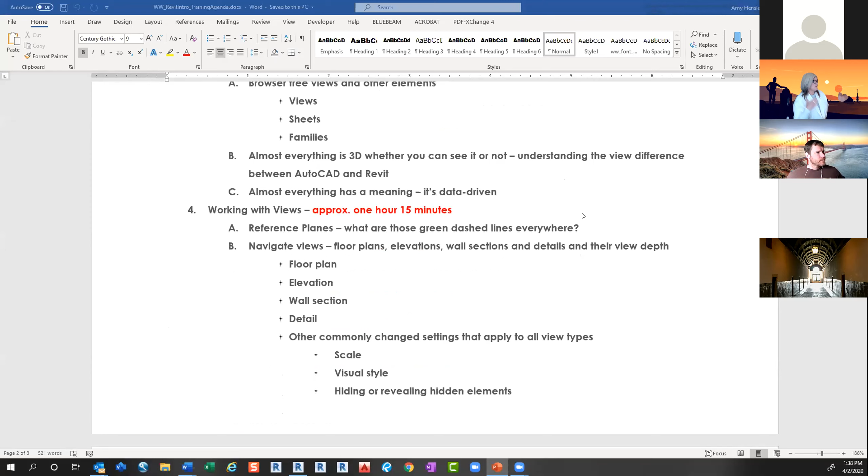So what we're going to look at today: we're going to talk about opening the file and working with these dialog boxes, we'll touch on some of them. We'll go over the Revit workspace, browser tree, understanding properties, working with views. First, I'll walk through information about views, how to navigate them, understanding what you're looking at, depth, and all that kind of stuff. After that, in section C here, we'll walk through me showing it and you guys creating these things, cutting up the model and creating your own views, and we'll talk about exporting those to DWG.

We'll have a little break in there. And then we'll go into some of the basic editing tools that you might need, and then some annotation. And then we'll do a little bit at the end about how to customize the workspace.

So again, in this part, when we talk about views, I'll walk through some important things that'll help you understand, and then when we get to creating your own, you'll have a pretty good idea. Let's see how that goes.

Okay, so first, hopefully everybody got a file copied over to their local. I'm going to move this over here. From this home screen, the best practice for opening a file in Revit is to open it from the open command. You don't want to double click it from the file manager.

When you double click it from the file manager, you miss the option of detaching from central. You're not necessarily sure what version you're opening it in, and version does matter. So I always just go to File Open or from the home screen, which will look like this or similar if you're in 2019 or 2020. We just do Open.

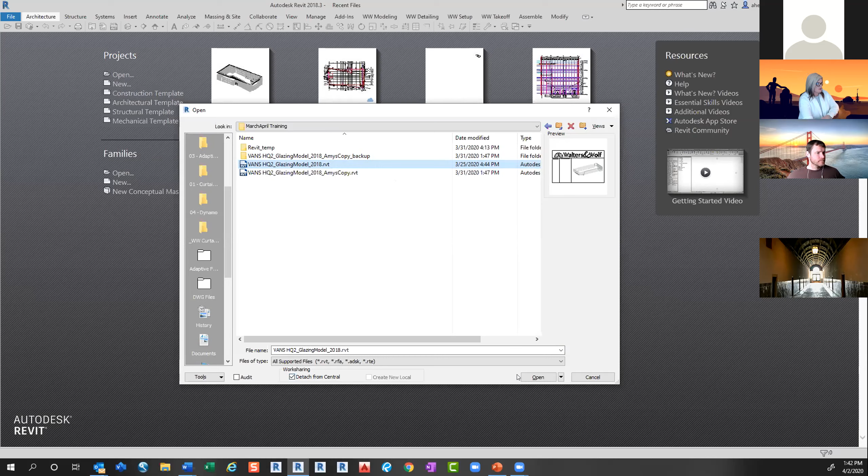Now when I pick open, I'll get the option to detach and preserve work sets or discard work sets. At this time, you can do either. It's probably faster to open with discard, but preserving them, if we have set up work sets, that can help with visibility and stuff. But it really, at this point with what our models and stuff, it doesn't matter. So I'm just going to discard the work sets just to show it's not critical at this time.

Depends on what you need it for, but we don't use them much ourselves yet, but we'll probably be getting there. So now it's just going to open up, and there's my file.

So I'm going to switch to my help document to show... actually, no, I want it—oops, pardon me. Yeah, it's in here.

All right, so your Revit might look like this if you've never really worked in it much or customized it. Since mine's already set up differently, I just grabbed this off Autodesk's website. So what we have is our main work view area.

This green area is what replaces the command line in AutoCAD. If you're used to looking down at the command line, you're going to want to train your eyes to look up here and watch what happens. Depending on what you're working on, you'll have different options, checkboxes, you can enter dimensional values and all that. That's a big shift in practice, where you're looking. You might enter a command and not know what it's asking you for, so you just want to get used to looking up here.

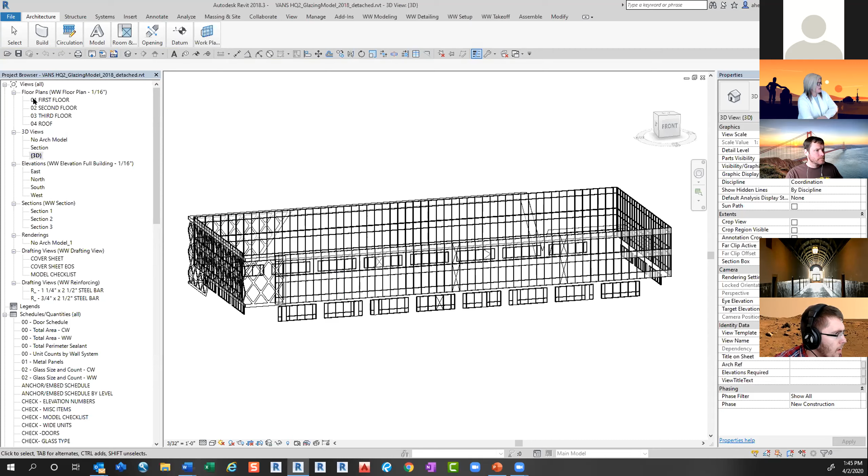Okay, so we talked about opening the file. Everybody hopefully got into that first view. This is just a default view, because of the Walters and Wolf model, set up in our template I believe. Or it might be one of the views with big long strings of text. It's just an opening view, and we're going to get past that pretty quick.

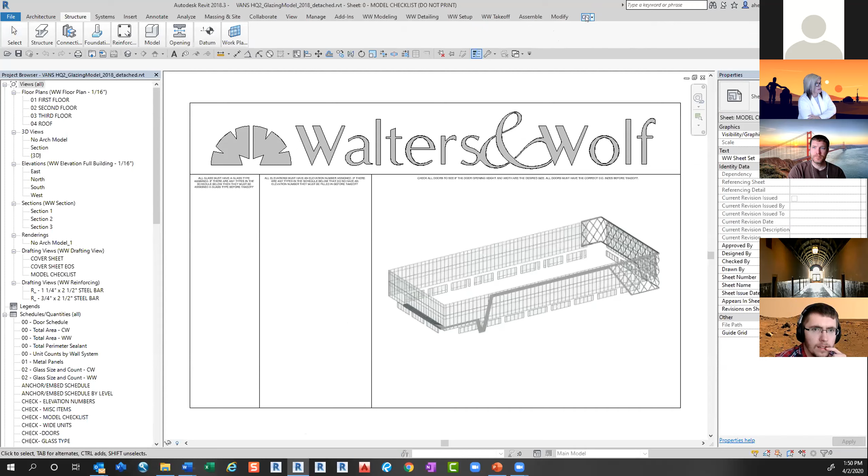So, the ribbon - this little arrow at the end. Here's the whole ribbon, fully expanded. At the right, there's the option to minimize it. I usually do mine like this. You can completely collapse it. If it's not there, just keep hitting this arrow and toggle through until they all show up. Let me know when you're good to go on that, and I'll keep going on the ribbon question. There's a little tiny arrow there at the end of this.

Or if you want to share your screen, Paul, that's fine too.

Let's see if it's there. Oops. Why won't it let me unmute? Oh, Zoom. Unmute all. So I can see it.

I do have the ribbons now, but they're just different looking than yours. I seem to have the ribbons you're talking about. What version are you working in? 2019. Okay, yeah, so there are probably some little differences. I don't have that properties bar that you have off to the right. This over here? Yeah, I moved it over there. Mine's off to the right, and it's got a lot more stuff in it than yours does, so it seems like it's all compounded into one big ribbon on the right. Yeah, okay, we can take a look at that. We'll look at customization at the end. So if we want to mess around with that on screen, we can totally do that. That's fine, so we'll go back to that then.

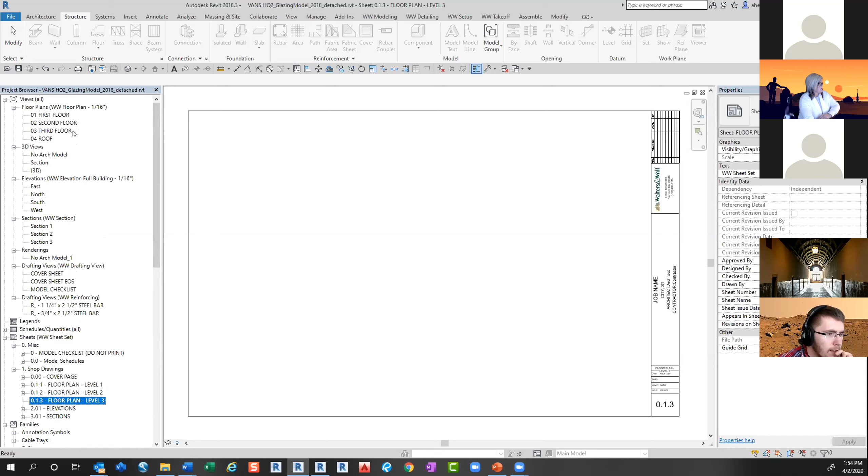No problem. Okay, so just to show you what I was talking about, let me get this view. Whoops, let me delete it here - remove from sheet. So this is just a border, the piece of paper, and the views are all up here, and it's supposed to be for floor plan level 3. So all I have to do is build my model, cut up my thing, create my views, and then I just drag those views onto that sheet.

So let's go ahead and place that view - it's taking a second. There we go. So this is like paper space - right now we're 100% paper space. I can double click to activate the view, and now I'm through my model space window, and I can right click to deactivate. You can also right click to activate, but I like that they added the double click. But ultimately, to really get to the whole view itself, you can either open it from the browser tree here, or since this is the view on that sheet, you can just double click on that view here. And now I'm just 100% quote unquote model space.

So, but we're looking at the model, like these are live elements. Something I'll point out now that you might not have set up yet.

I believe it's on the quick access toolbar by default. Let's take a look here. Maybe this one's a little squished. You should be able to find this little button that's thick lines on the left and thin lines on the right. Once you set it in Revit, it stays. But if it's not set, you might have something that looks like this. So you pick on that and it changes it all to thin lines. What this button does is let us see how it would look if printed, but obviously it's a garbled mess. So I always leave it on thin lines, in case you're wondering if yours looks thick.

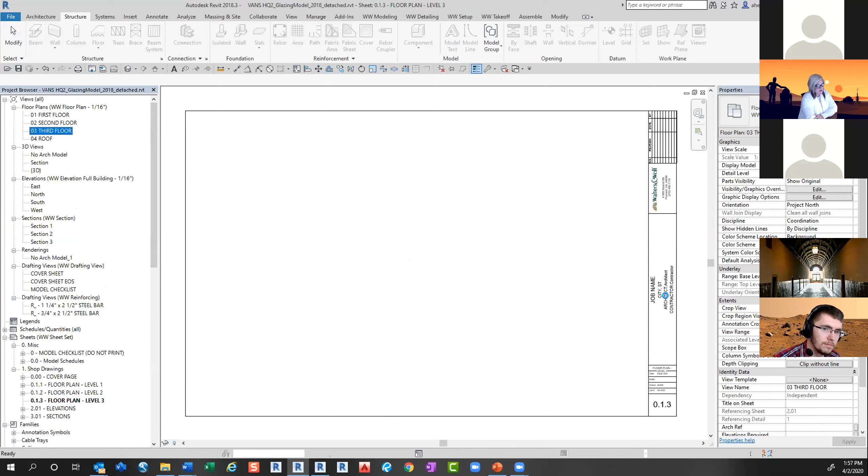Once that view is on the sheet, if you're in a sheet in a project and you don't know where the view is or how it's stored, like this gets all customized and crazy, you can at least go to your sheet and double click right from there, and it'll take you right to the view.

Got it, thank you. Yeah, sure. That's the fastest way to access it, especially if it's like an architect's project—who knows what. Like ours, we have pretty consistent standards that we can get used to.

So that's partly just to help understand that we've created the model, we've cut up and made these views, and we're placing them on sheets, and that's all controlled over here in the browser.

Going back to the point of almost everything is 3D. So obviously we know that this is 3D. It's a model, we can spin it around and pick on these things. But grids are 3D, levels are 3D, everything, everything like is on a plane.

Pardon me for a second. A bunch of noise coming from the house.

Okay, sorry about that. So I'll explain that by going to, say, the south elevation. Right now you can see there are these levels, and these levels are forever in that model. Once you create a level, it's creating that plane in the model.

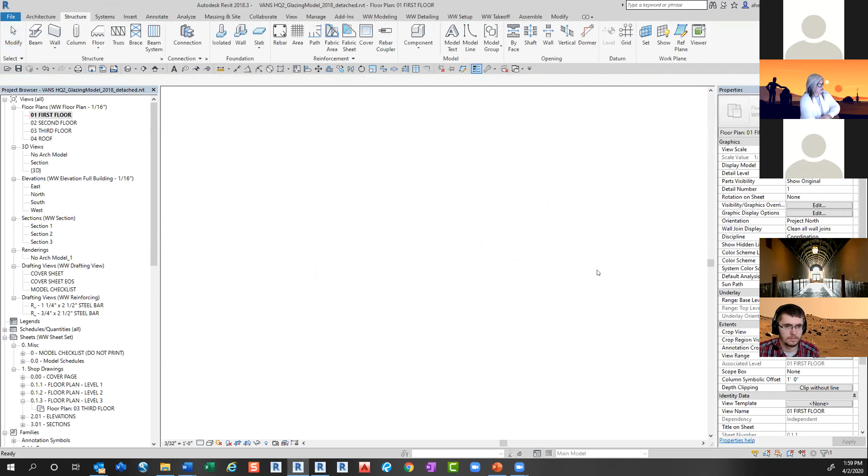Okay, sorry about that. So that grid, why is that one going through? Well, my point was going to be, once I grab these by this little grip and bring them all down, now that grid is cutting through all those planes, and if I go to the first floor, now I can see those grids.

So I went to the south elevation using the browser by double clicking over here. You can also, if I want to go to this elevation over here, I can double click, or I can pick and right click, go to elevation view.

So this is just kind of explaining how everything is, even though it's just a grid line, it's still 3D. So I just dragged all those down, and if I go back to my first floor, now you can see those grids. So if you ever get in a project and you can't see grids or whatever, try going to an elevation and see if they're just not cutting down through that floor.

But that's just trying to highlight the fact that everything in here, even though you're just cutting a view, it has depth, it has information, it has properties. So we'll talk about properties next.

So if I go back to my 3D view, and again, I showed you earlier, when you pick on a curtain panel, you get all kinds of information here. So right now in this view, or any view you might have open, if you just pick out an open space, you're going to see information about the view. If I pick on a name of a view or something in the browser, now I'm seeing information about that because that's what I selected.

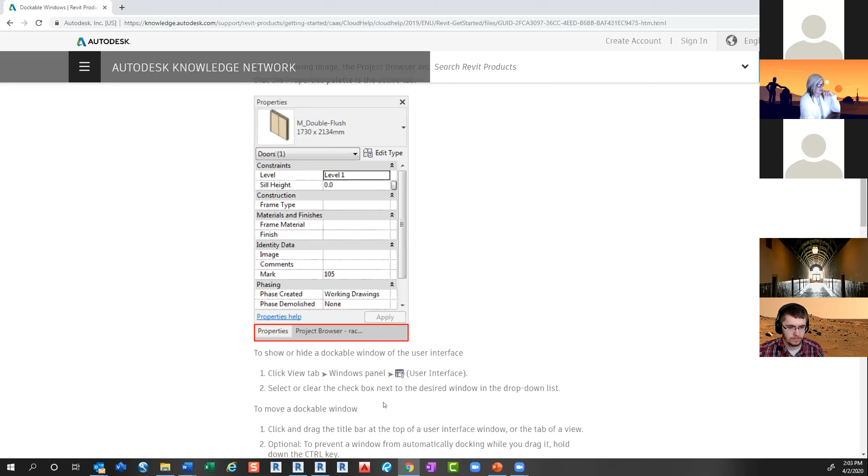Okay, so do you mind sharing your screen and we can take a look at that? You can try it. Because you might not be the only person that has that question. I think what you have to do is grab the title bar at the top. Yeah, okay, so you're gonna share, okay, great. Yeah, right, go for it. Okay, can you see my screen?

Not yet. All right. There we go. All right, how about now? Okay, so I have this over now here. You can see it, fine. Okay, if I try to drag this over here, both of these come with it. So if I try to go like this, and it wants to go to my second screen. It's not kind of letting me do, and then it wants to go horizontal, which I don't like. Right. Can't seem to get it to do. It goes that way, but it won't go left or right.

Let's see, try to ungroup within the group, click the tab. So can you try clicking and dragging the tab instead? Did you try that yet? Yeah, try grabbing that and dragging that. Did it undock it? Oh, it did. It separated it, okay, great. So go ahead and try dragging that over to the right. There you go, awesome, it's the little things. All right, so yeah, okay. So we know we need to grab it by the tab. Okay, and yours popped right into place. Okay, good, okay, I'll stop sharing.

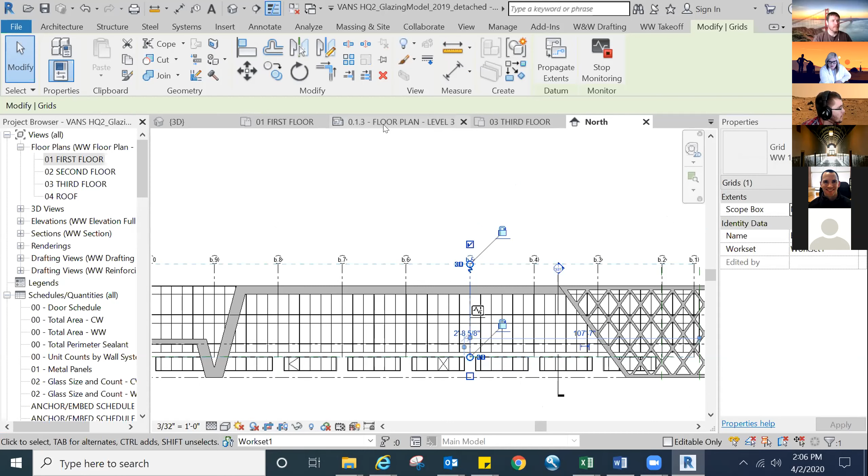So I'm trying to just, you're going there and dragging down? Oh okay, grab on the open circle part instead. Oh okay, that little guy, yeah. I kind of did it quickly, but in this case it's finicky. You kind of have to zoom in and make sure you're grabbing just that open circle. So now you've got it. There you go, you'll see. So there's all kinds of grips. Yep, there you go, okay, so it moves all of them. Got it, okay, thank you. Okay, yep.

All right, so now we'll get into understanding how to navigate these views. If you want to make your own views for your own dimensions and your own purposes, or even if it's RFIs or anything, understanding how to work in these to get what you need for references is really important. One of the first things you'll probably notice is there's these green dashed lines everywhere.

Those are reference planes, and sometimes we need them. The modeler needs them. Sometimes we just make them temporarily, and then we're not very good at cleaning up after ourselves. But if they're in a model you're working in and you don't like them, you just want to make sure you don't delete them. I'll show you how to hide them, because there may be elements in the model that are actually constrained or locked to those reference planes. And if you delete the reference plane, you actually delete elements that have been modeled.

So if you don't want to see those reference planes, you can hide the category in the view. There's a whole lot of ways to play with the visibility options, so we're just going to touch on this one for now. If you pick on the reference plane and right click hide, and tell it category - we're going to go over this again later - you can go ahead and do it along with me though. I just hid the category. So down here on the bottom, that hides all the reference planes in the entire view, just this view.

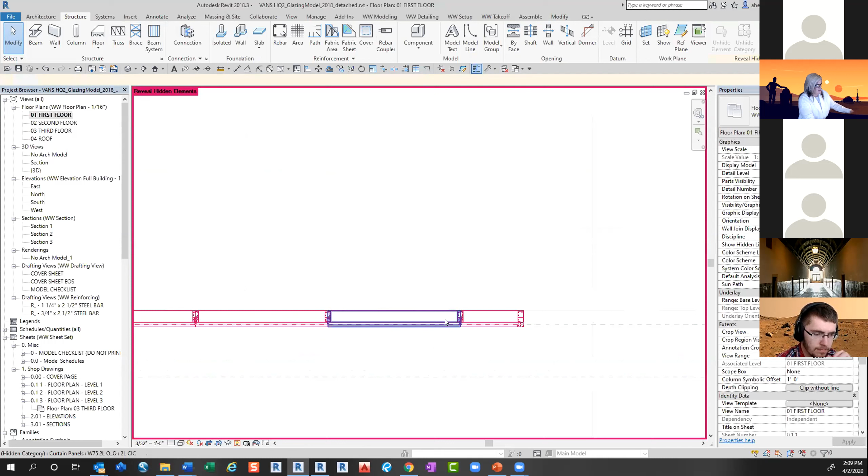If I wanted to hide the curtain panels, I could grab a curtain panel, right-click, hide in view, element, and just hide the one curtain panel. I'll undo, or I can right-click, hide in view, the whole category, and now I don't see those curtain panels anywhere. Then to bring them back, I click on that little light bulb, and then I can see it. I right click, and since I know I did the category, I'll do unhide category. Elements isn't even an option. So you can do a single item hide or a whole category hide.

There is this temporary hide/isolate where it's just for the moment, it does this same kind of thing. If I click on that, I think I have to pick an element first, so I'll pick that reference plane. Then I say isolate, and what that does is turn everything off but this element - or isolate category, isolate element, or isolate category. If I do that, I see everything of just that category. But this is just a temporary setting, so then I just can say reset.

So if you know you don't want them in your views, the way to keep them permanently hidden is to do the right click, hide in view, category. Now in your view, you don't have to see them at all. The other way is just temporary. I'm going to do a Control Z to undo that. But that's the reference planes - I'm just explaining the part about hiding the element now because it's important to know that you don't want to delete those, because it could blow up the model.

Okay, so we'll talk about floor plans first. Floor plan views are created based off the levels that are in the project. So if I go back to the south elevation, I just clicked on it in the browser.

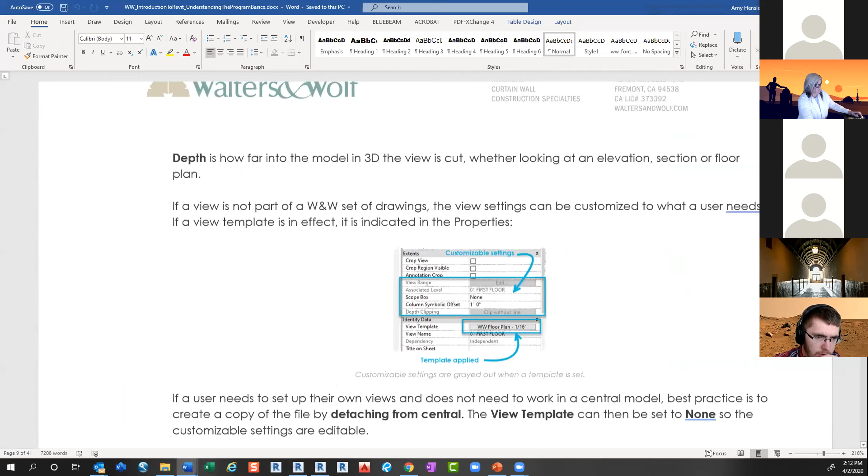So I want this view range to change a little bit. By default, it's got several settings in here, and this little picture is supposed to help you understand this. This is the part that takes a little while sometimes to get your head around, but I'm going to bring it up in the Word document because I can zoom in on it. This is right here.

That same level—but you can also tell it to go below, like an underlay if you want it to look at it that way. So you can have this view depth, which means you're setting it to look even further down below. The top, I don't usually really mess with that. Maybe that would matter if you were doing a reflected view, but I never really mess with it unless I need to move my whole cut plane way up high, and then I'll just set the cut plane and the top at the same level. So this one's kind of a funky one. I hardly ever mess with that.

But to show you what that means in Revit—right now I'm cutting the 3rd floor, but if I want, I can tell it to look all the way down to the 1st floor, and that way I can see things that are going on below as well. So that view range has default settings that, once you turn off the template, you can go in and change. I'll just set it back to the 3rd floor.

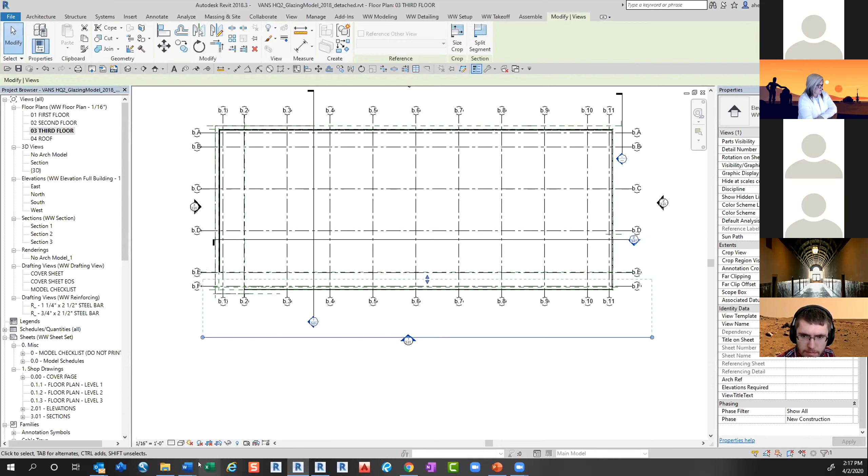So what that looks like - here's their elevation, and there's their far clip. Here it's saying clip without line, so there's no edge around, you're just seeing the extent of what's happening at that point. Here they're saying clip with line - I want to see a little edge. And this one is where they're not even clipping - it's not clipping at all, it's just showing everything, even though the elevation bubble is out here and the line's there. So that's the difference between those settings.

I usually use clip with line to make sure I know exactly what I'm looking at. When you're in a wall section, it has the same kind of settings. You can drag it to see how far you're seeing into that model - again, you're cutting it live. You can move it, and your view will change depending on where it is and what you're looking at.

If I go to this view now, I can see this wall here, and I can see this wall here. But if I want to see more, and this is what I do when I'm checking my models, I'll actually drag that line all the way down. If I go to that view, now I can see what I'm cutting through, and I can also see what's beyond. This is how I like to check to make sure I actually got my horizontals lined up - I can put a little reference plane here, run it across, and see if I've got everything lining up nicely.

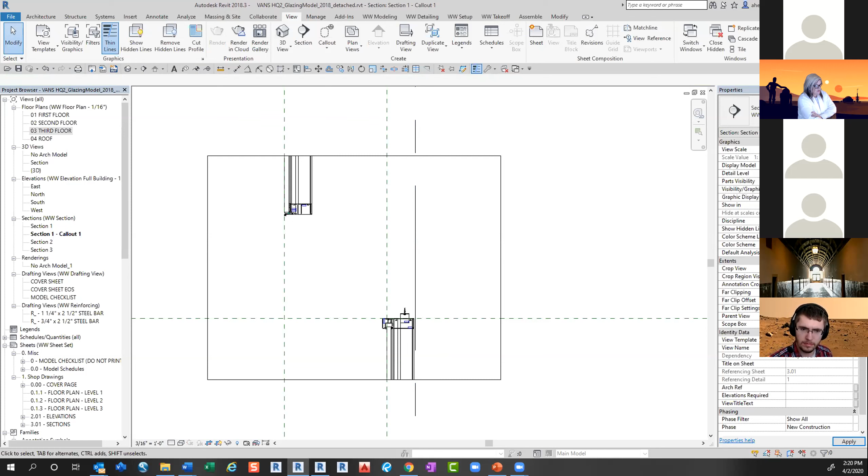If I go to it, first its settings are the same as the parent view as far as how far it's looking, so usually that's probably fine. But if you wanted to do something different, you could go independent and change that far clip offset value to like 50 feet, and then I'd be looking all the way down to, maybe it's like 300 feet. Now I can see what's beyond, so you can mess with that. But by default, it's the same setting as the view you cut it on.

So that's just a rough overview of how what you see is manipulated to show what you need. In floor plans it's with the view range, and in elevations, sections, and details it's with that grip there—shows you how far you're looking.

Some of the other settings in the views are your scale, which I use this one because I like to see the whole list, but it's also up in the properties. View scale by default with Walters and Wolf views gets set by default. If you're working in an architect's model and want to create your own view and do your own thing, you can just mess with the scale, whatever you need it to be, over here.

Hey, there's Amy, visual style. Yeah, another question. Is there a way—I guess I'm having an issue where I'm not seeing your full screen, so when you're going down to the bottom to select certain items, I'm not sure if it's just a setting on my side on Zoom, or if others are having that issue.

Let's see, let me see if I can help with that. How far down—can you see this down here now? Yep, I see it now. Can you see where I'm at? Okay, all right, so I'll just keep it a little bit shrunk. Okay, all right, thank you.

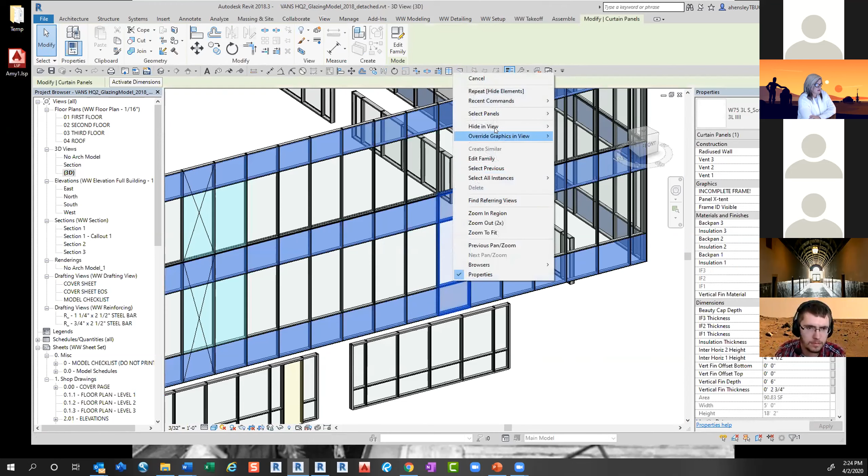Or I can right-click and pick 'hide category,' and now all the curtain panels are hidden. Then I come back, right-click, and unhide that category. This is really helpful, especially in architect's models where there's a lot of extra stuff you don't need—you can just pick on it and hide it. There are lots of other ways to control visibility, but that's one quick way to get something out of your way.

Okay, so now we'll walk through making your own views. This is the part where you can work along if you haven't yet, but if you were, that's cool. Go ahead and go up to the floor plans, select the first one, hit shift, select them all, and just hit the delete key.

Okay, so now we have no floor plan. What happened? This is going to happen if you open a model that we've cleaned. When we get architectural models, sometimes they're 500 megs, 800 megs. We have a Dynamo routine that can delete all the views, links, drawings, sheets and other stuff, letting us shrink the file down a lot. But then you open it and there's no floor plans. So how do you get your floor plans?

We'll talk about making a 3D view too, since that'll be one of the first things you want. To get a floor plan back into a model, you just go to the View tab and the Plan Views option, and from that drop down just take the one at the top. I'll walk through this a couple times—this popup is going to show, it always does.

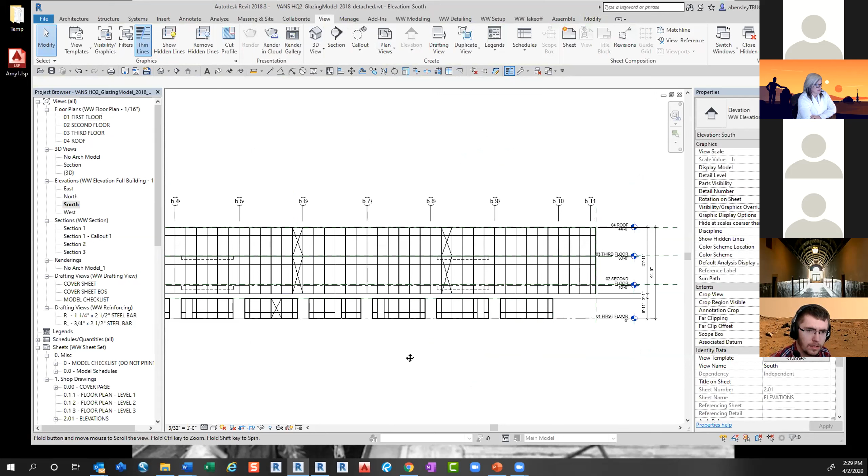I went to south and I don't even see those grid lines to drag down. Okay, so let's see, what are your settings? Let's look at your screen—go ahead and do a stop share.

Can you see my screen? Yes. Do you see my Revit? Yes. Or is it just my screen? Okay, this is what I'm looking at right now. So where are you needing to look? So, no, you're in the right place. Those grid lines are up there.

See the B10? Like any one of those, if you select it, go ahead and select one. Oh, I see. Now zoom in and make sure you grab—that's the annoying thing, zoom in a little bit. You want to grab the open circle part, since there are other grips that get in the way, so it's always annoying. Go ahead and drag those down, and those will show up on the first floor, because you're telling those grid lines to live all the way down below the first floor. So now if you go to your first floor view, you should be able to see those.

I see, and there they are. Yeah, okay, cool. Thank you. And yeah, sure.

Sorry, when I was following along with what you were doing, I think I grabbed the bottom open button, not the top one. Oh no, I grabbed that top one, right? But is that the right one to grab? That one stretches them up and down from the top. You're in the plan view, and in the plan view, either end just stretches them further out from the building.

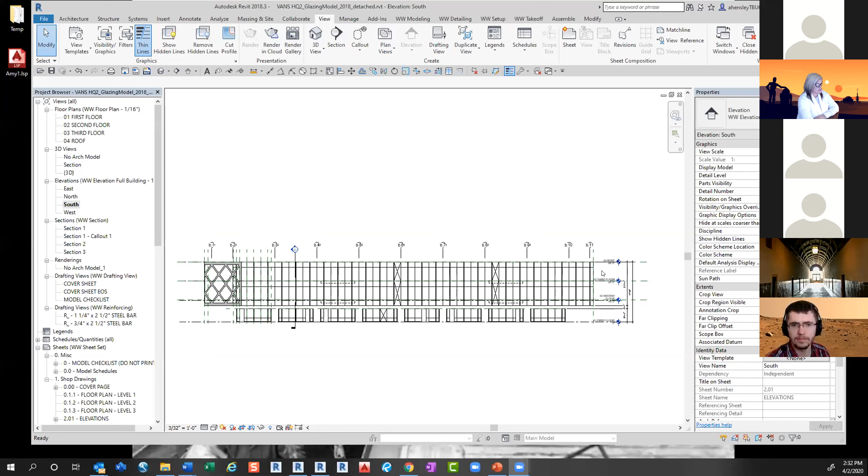So just a little bit more about those grid lines. By default, they're 3D, and you know your grid is still 3D because it says 3D right here. No matter how far I zoom in, it does not get bigger, which is crazy. But there are a lot of different symbols and things happening when you select that grid.

Revit is letting you know some things, like this is locked in place, and this is locked in place, and this checkbox turns the bubble on or off. This tells me the distance to some other element, so that's a temporary dimension. This tells me that this grid is being coordinated with another model.

So right now we see it's 3D. If I pick on that, it changes to 2D. Now if I stretch that one down—see, I grab it wrong all the time—now it's just 2D drafting basically. Oh, it switched it back to 3D.

Now I don't know—let's see, at that point if it's 2D, I think it's because I dragged it first. You can tell them to be 2D, and we do that sometimes for drafting where maybe we don't want them showing up everywhere for whatever reason. So you can tell it to not be 3D anymore.

Top and bottom, there we go. Now if I get that and drag it down, it's not going to show because it just sees it as a drafting kind of line now. So as long as it still says 3D, I'm just doing some undos.

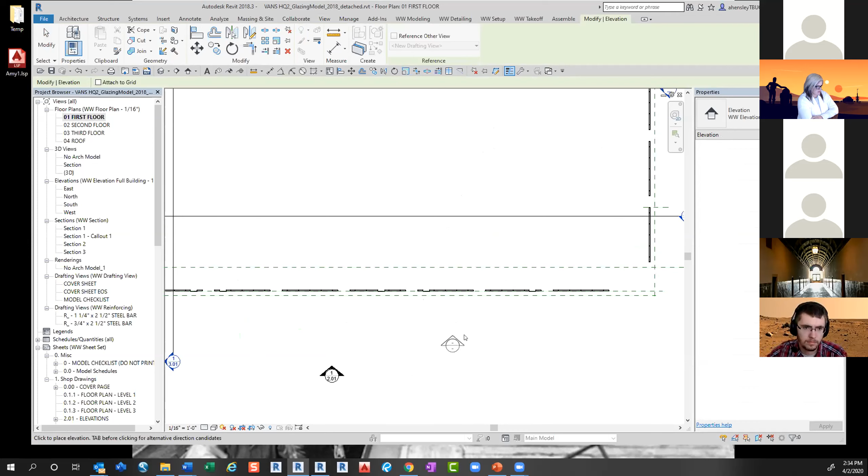And it's bringing in our Walters and Wolf elevation bubble. You can see as I move it from inside to outside the building, it looks at it. It's intuitive—it knows by default where you want to look. So I'm just going to go ahead and pick to place it. It asks me if I want to do another one, and I'm just going to hit escape.

I'm going to show it to you first—we're going to walk through this again too, so don't worry about trying to do it right this second. So you place the bubble and you pick on it. Hopefully the crop region visible is set; if not, you check that because that's how you get your little grips. And I'm just going to make a little elevation right here.

And then this is fine where it's at—this is how far into the model it's looking. I'm going to right click, go to elevation view. Here's my crop region, I can pick on it and adjust it. And then I can just finish it off like that. And now I've got that view.

And if I wanted, now that I've done those view settings, I could grab this and copy it over here, and now this view is set exactly the same way, but looking at the next bay. Which is different than—I'm going to delete that view, then if I come in... whoops, left some junk behind.

If I create one here all over again, that means I can also double click. I didn't adjust the crop region, but if I come in here and I've got to do all that—whoops, I do that all the time too. You probably will too, it's okay. It's not critical where this line is; it doesn't have to be right on the center of your symbol. It can be like right there and it's okay.

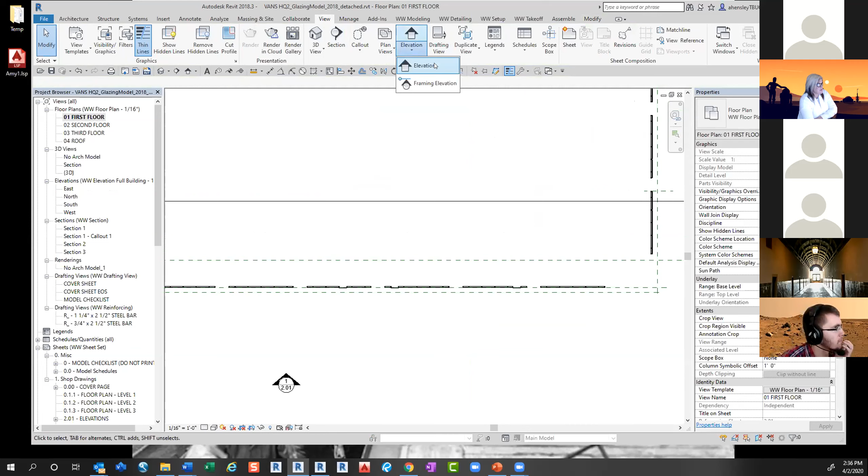Okay, so again, view tab—this is where you can do it if you haven't done it yet. You want to get that elevation bubble and just place it. You can see that we get a new view in our tree over here, elevation 1A. If I hover over this, it tells me what view name it is. If I pick on it, it should tell me right down here—that name right there is the name in the browser.

And then I can grab my grips on each end and go to my view.

So with this crop region, now I'm just going to drag the bottom one up. You'll notice there's a little lightning bolt looking break. These are break lines, so if you had a really long elevation and just wanted to capture things at each end with one big view, you can break it.

And then you can stretch these a little bit. You can move them with the double arrow and fit it better on your sheet, so that helps with drafting. You can move them further apart, and if you bring them back together to where it looks like they'll overlap, it just rebuilds the view.

And then I grab that crop region and just drag it down. Because it already created that with the 1/4" scale, if I wanted a different scale I could change it while there's a view, or I could change templates, or change it here if I didn't apply the template. So that's the basics of creating an elevation, whether it's a full elevation or a little one like this.

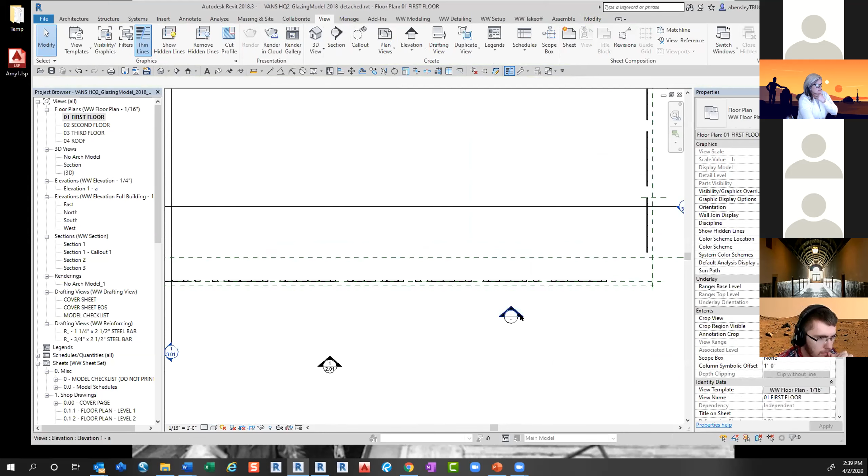Could you go over how you got the two little tabs? I keep getting the entire elevation when I drop it down. Two little tabs, yeah, you only got a small elevation view.

Okay, so I'll do this and start that again. I'm going to delete that one. Okay, so view, elevation, find my wall.

I'm going to grab on the symbol, stretch it in. Oh, I see, you drag it in. Okay, and then in the elevation view you can adjust the height, if that's also what you're asking about. That made sense. Okay, thank you. Yes, you're welcome.

So just to note, we'll talk a little bit about crop regions again right here. Right now I told that elevation to just look at this much of the model, and I have my crop region visible, which has some settings over here: crop region, hide crop region, or do not crop view. That's the same as these two.

So if I don't crop the view, I can see the whole model for the moment. Maybe I know ultimately I just want my view to show this, but I need to see something else for some reason. I can leave my crop region there and just tell it don't crop the view for a moment, and then I can see the whole building again.

Once I've placed this on the sheet, maybe I don't want to see my crop region anymore because it bugs me, so I can just turn off the crop region. That's nice to know, because even though you just see this, if you need to see the whole building, you don't have to switch to another view. You can just tell it don't crop it for a sec, I want to see something, and then okay, go ahead and crop it.

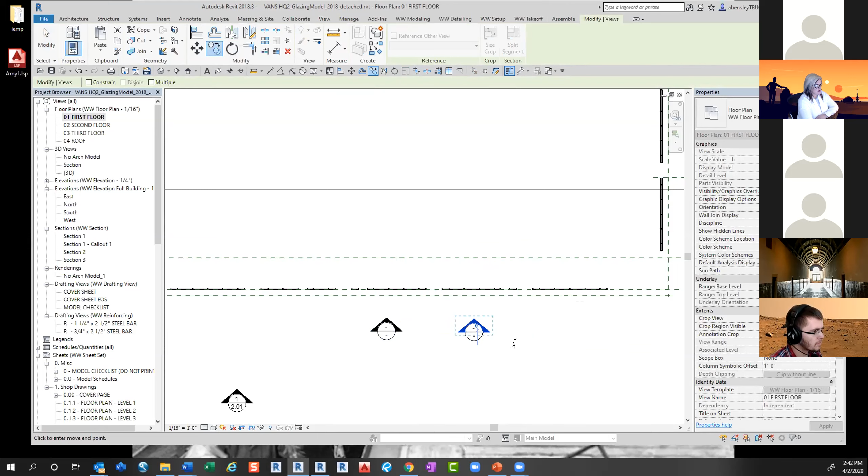Okay, great, so you can pick on it and use the copy command, and you can also do a Control-C like normal cut and paste or copy and paste. So now I just did a Control-C, Control-V, and then just grab it and move it to where I want. Or I can pick on it, and on the Modify tab this is the copy command that we'll look at later. You can use that same command here, and you could copy this. And if you want to do it all the way down the wall, before you start copying, go up here and select multiple—it's not on by default.

So let's try that again. Duplicate, let me try this again. That should be fine, you should be able to copy this. Yeah, I don't know why it gave me that. So now I can just copy these all the way down.

And now I'm getting all these new views created over here that I can go back and rename. They're all looking at that part of the model, or you need to just adjust them. You can adjust it here. So if I adjust the crop region here, it will adjust it in the plan view as well. I'll show you what I mean by that.

So I just fixed the crop region there because I was kind of messy with my copying. Let's see, which one was that? Was this one. So when I adjusted that in the elevation, you can see that it fixed it in plan because it is that live crop region.

So right now this crop region is cutting through here. Say I can fix it here if I want, or I can go to the elevation view and fix it here. It's probably better to fix it in plan so it's nice and everything's centered up. But I fixed it there.

So now my crop region's over here, but I can still move the symbol separate from that. And there's still that crop region. So if the symbol does, sometimes there are tight squeezes for trying to fit the drafting part of it.

So maybe I have to move my symbol for some reason. But when I highlight it, you can see that I'm still just capturing this area. So don't worry about the symbol staying with it if it doesn't need to, because this is the main cutting information right here.

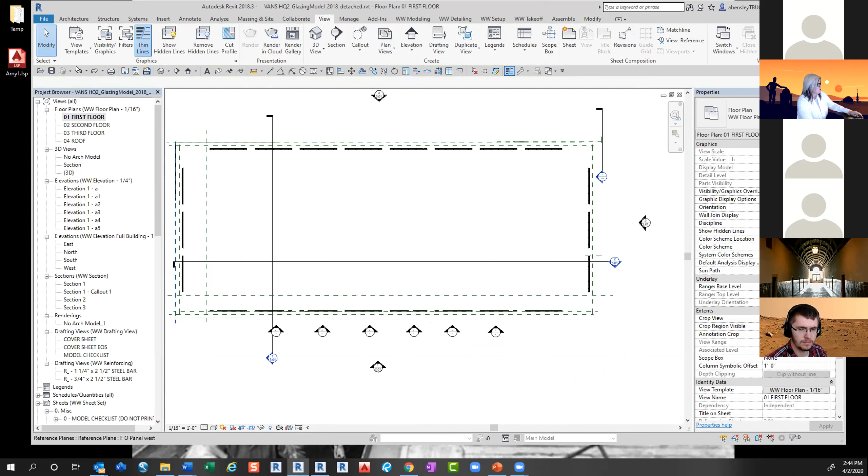So I can go undo, copy, undo, undo. Okay, so what I had done was I grabbed it and did copy. Well, the first one I did copy paste. Yeah, when I did that, I just tried it again and then it was okay. So I don't know, if you do it a second time and it's still doing it, let's take a look.

You can share your screen. Yeah, definitely still cannot get past it. Okay, so let's go ahead and share your screen and let's see what's going on.

Oh, that's the big elevation. Okay, it might be because that's a full elevation. That's not the one, try making your own and then let's copy that one. I'm not sure if that's because of something, since that's a full elevation that was already in the model.

Let me see if I can even copy it on mine. No, I just created this one. Oh, you did? Oh, okay. I thought that was the full elevation, but I guess it's not, right? Sorry about that, go ahead and do the copy command.

I'll do that. So after that, do I just click anywhere? Yeah, sure, pick 2 points to duplicate. Okay, go ahead and cancel that, and grab - instead of selecting it the way it did, do a window around the whole symbol.

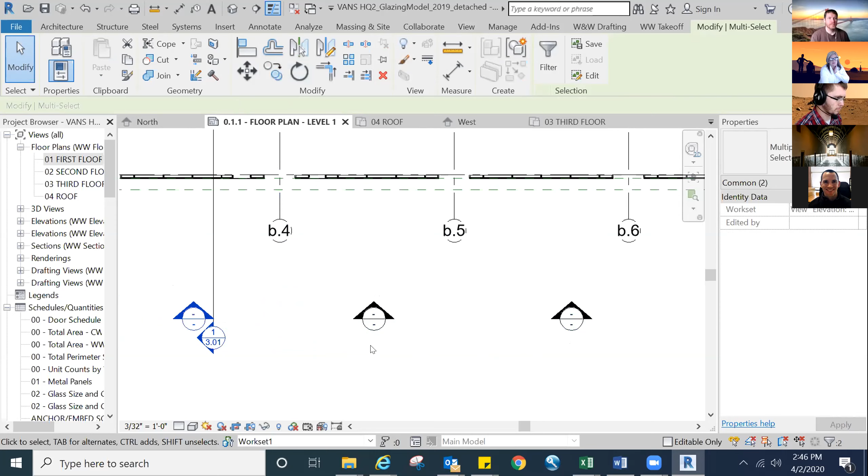But if you make sure that you're correct - see, when we just do that part, it doesn't want to. When we just pick on the arrow or the triangle part, it wasn't working. But if you pick on the whole symbol, you should be okay. Yeah, seems like the difference is clicking on the right-hand side and then extending over to the left, versus just clicking on it or going from up or down to lower - it won't grab it.

Yeah, exactly, so it's a temporary thing. Just change the way we're selecting it. Alrighty, good.

Oscar, I was having the same issue too, and now that I did it that way, it worked. Okay, great.

Good, okay, so that was creating the elevation. Now we can look at, if everybody's good to go, we'll create a section. Same thing on that view tab, section cut, and then just pick 2 points where you want your section to be cut. It shows you your little crop grips, and you can bring it in, and it creates that view over here in the browser.

If I want a section here, I'll just do view section. I can do a little short section here, and then I can grab my grips. And then what you'll see, a couple of things I want to show you here. I'm going to move it over a little bit because it's in the way of that bubble.

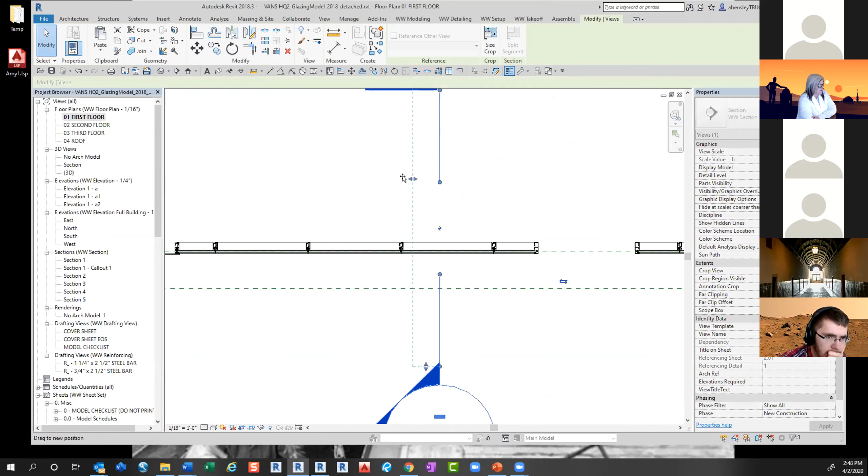So right now, if I pull this crop region in, right now I'm just telling it cut here through these horizontals, and that's all I want to see. So if I go to this view, I'm not going to see a vertical beyond. I don't see anything but what I'm cutting through. But if I adjust it by picking on it and grabbing that little crop line there, go to view now, and now I can see the vertical.

So sections, let's see what else about a section. You can grab it and you can grab the grips, and even though the drafting symbol is still just there, now my view is cutting through the whole building.

I can pick on it and just stretch it back down here and go to it. But again, if I want to say don't crop the view, I can still see the whole building. And then I can tell it to crop that view again. The symbol comes with a little break so that you can make it pretty.

If you want to make one section and then move it around the building to look at other things, you could bring it over here and you can rotate it. I'm just going to type in 90 and move it - we're going to talk about rotate later. Now I'm looking at this wall, and now I can check things this way if I needed to, depending on what the purpose of the section is. I'm just going to do a Control-Z to go back to where I was.

So the other thing to point out is now that I've created this section right here, if I go to this elevation, that section callout now shows up. So it knows everywhere where it lives. And now I can grab the height of it here if I want.

Just do some adjustments and say, I just want to look through this part. If I go back and do that, so that it's looking - go back one more. Okay, so now this is where it's really looking, even though the drafting symbol is just there. If I go to this view, I can also grab that crop region here and shrink it down to just what I want to see.

If you want to make it, I'm just going to delete that. If you want to make it on your little elevation so you can see how it shows up, just grab that section tool, pick 2 points, adjust that far clip line to where you want to see, maybe put a little break in the drafting line. And then if you go to that view, again, right click, go to view.

A lot of times you can just double click - I think it's, yeah, you can just double click the section symbol if you want. Grab that crop region. So one of the things you'll notice right now is the text is really huge.

And that's because we haven't set the scale of this section view yet. It didn't have a template applied to it by default, but I can come over here and change it to 1/4 inch equals a foot. I can grab the little dot on this level and adjust it and bring things in for drafting purposes. So a little stuff to mess with there, but getting that cropped to where you want is just understanding how to control what you're seeing, which is important.

So that's a section view. Now we can make a couple of different kinds of detail views. In that section view, we could create a call out here that's looking at it - it's a section detail. In Revit, they're called call outs, not detail bubbles. And this has our little Walters and Wolf settings as well.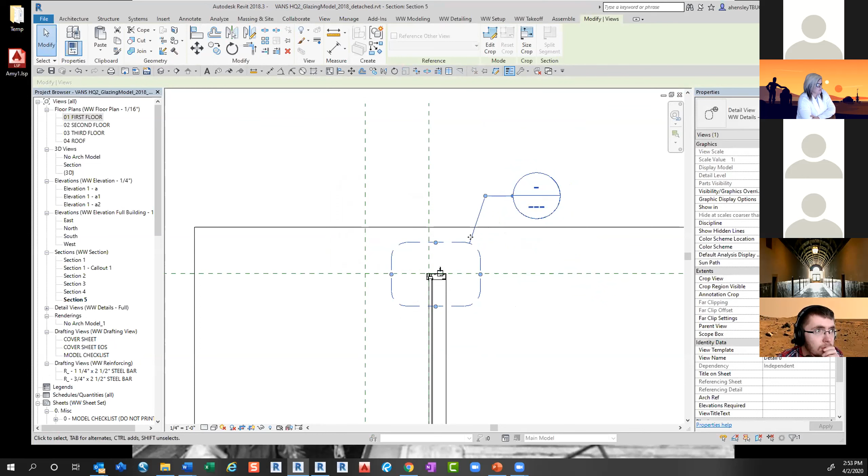I'm going to delete that. If you're in somebody else's model, you should still be able to just create a call out, and it takes whatever their settings are. It at least gets you to what you need to see, and it may not look as nice as this, but it still gets you what you need. Go to that view and then set that scale - turn off our template. Set that scale to 12 inches equals a foot, same as 1:1, and then you should be good to go with a full-size detail.

If you want to create a call out on an elevation view, you can do it a couple of different ways. You can create the call out like we just did and do a rectangle, and it'll make a little elevation view. Oops, I just double clicked it - you'll see that when I did that, I went into border editing mode, which we don't really need, so I'm just going to cancel that. Right click, go to view, so I get a blow up of that elevation. But I'm going to delete that.

And you can also do a section. In our projects you can use our little templates here, but you can do this no matter what. Now when I pick 2 points, I actually get a little section cut detail symbol, and I have the little flip grip - I didn't talk about the flip grip in a full section, but there's the flip grip, so you can just switch which way you're looking with your view.

Tab - sometimes if you try to select something and it won't let you, just hit tab until you get what you want. There's a lot of tabbing in Revit if there's a lot of stuff congested or whatever. So if you try to come over to this, let's see if I pick on something else - just hit tab if it won't let you grab it, until you get your grips. If I pick close to it I can't grab it, but if I hover there and hit tab, then it highlights it and then I can select it.

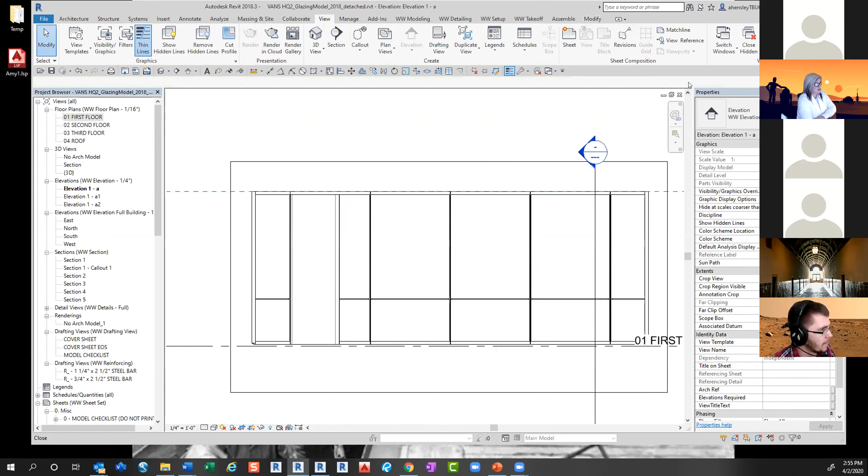Okay, walking through those different details again - I'm going to delete this, and we'll go back to the section view. Delete this. So in a section view, if you want to create a section detail, on the view tab go to call out rectangle. You can use a template if there is one. You'll see that until I get big enough for the bubble radius to have its curves, it's just a little square - it depends on the settings in the project.

Sometimes you can't get around that, it just depends on the settings. And you can just drag that around - now you have your detail view. Go to that view, set the scale. This one has the template, but if it did not, I would tell it to be 12 inches equals a foot.

As you're collecting all these views - we'll still stay on the detail view, I'm not going away from that - you could create your sheets. Here's my new sheet, and now that I created that detail view, I can put it on the sheet. I can adjust the crop region, double click to activate that view. Now that I'm making it smaller here, it's going to turn into a small square on that wall section because this is a live cut. So I actually just placed that view on that sheet, but it's still a live cut - so back in my wall section, it turned into a little square because I made it such a small crop region. So there's sometimes a little give and take in Revit.

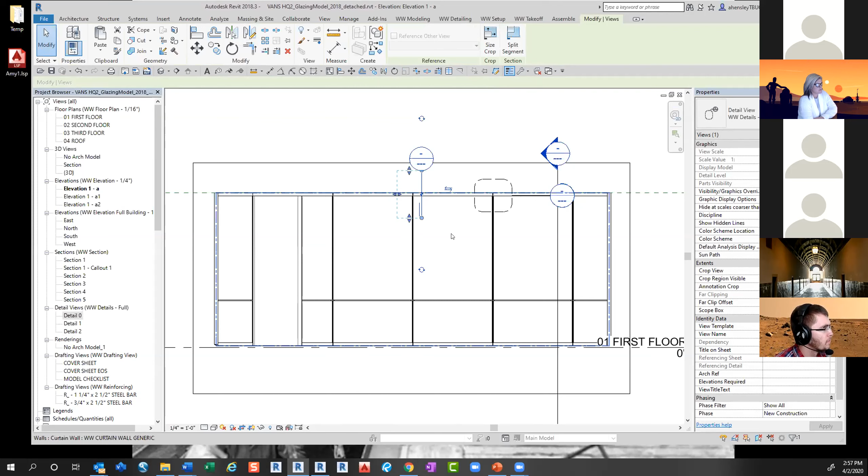Okay, so any questions so far on any of the detail views or section views? Everybody cruising along? Let's talk about creating a 3D view. That's really easy. Oh yes?

Sorry, I missed how to put the detail on a sheet. Okay, so we'll do that again right now, and then we'll go over it again, but just to show you, when you're ready to make a sheet, down here in the sheet section, if you're in one of our projects and you right click and select new sheet, our title block will be available.

If you're in somebody else's project, you can load in our title block. If you're working in someone else's model and you want our title block in there, the title block is a family that can be loaded, and once it's loaded it can be available here for you. So you just pick OK, and now it's created that sheet.

And that sheet is not categorized yet, so it just lives down here under these question marks. So now I've created the sheet. Now I just want to expand the part of my browser where that detail shows up, and then just drag it onto the sheet.

And once it's there, if I don't, right now you can see all these borders on it. That's because the crop region is visible. So first I could just say, I don't want the crop region visible. Let's see, is this annotation crop? Oh, that's just the viewport. Oh yeah, that's just temporary.

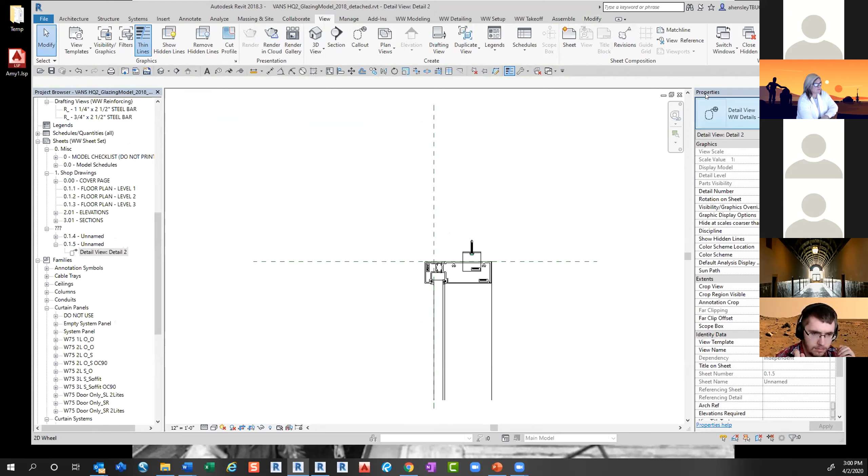So again, you just create a new sheet and then place your view on that sheet. We're going to look at that again when we get into dimensioning, because if you want to make it like an enlarged plan and put some dimensions on it and throw it on a sheet, we'll do that again. I don't think I have sheet creation in that intro, so I should put that in there in the document.

Okay, so to create a 3D view, that's a single click step. When I pick 3D view and say pick default 3D view, mine's already in here. Let's see, why won't you make me a... let me rename this. I'll just call it old.

Okay, 3D view, default 3D view. It's not using my username. Usually I wonder if it's because I'm not in a work shared environment. That's weird. Usually when you create a new 3D view, it puts your username behind it. It's very strange today, it's not doing the same thing.

And that's fine. When you're working in a work shared environment and a lot of people have their own views, that's nice. If you're working on your own, you can call this view whatever you want. So typically what I do is I'll go in and make that first 3D view if it's in somebody else's model and I want to see everything, because you don't know what you're going to get in another person's model.

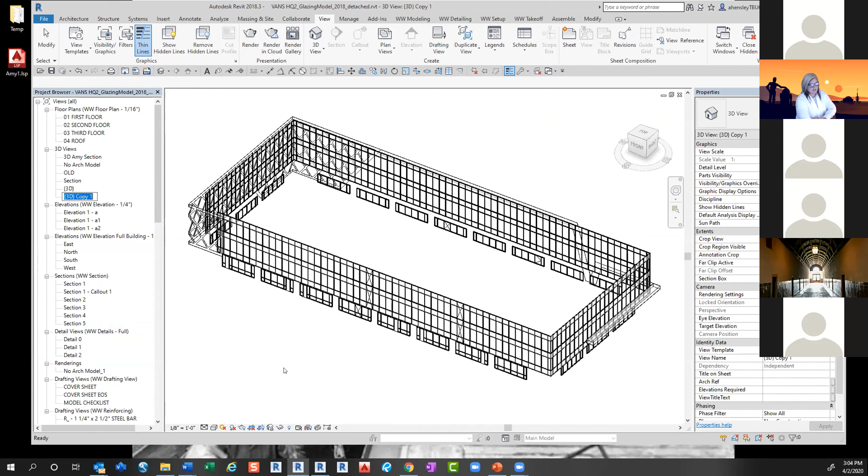So now we have our copy, and then just right-click and rename it to whatever you want. And if you forget to take out the curly braces, it will give you a message saying you can't have special characters like this, even though it does. So go figure. Just pick a name that works for you.

And then to make it that section view is when you right-click, and this time I'll orient it to an elevation view that exists. So I'll orient it to the south elevation. And now when I spin that by holding down the Shift key and my middle mouse key, you can see that it's mimicking the cut, the elevation and its cut with that crop region. And then I can go in, I can still do whatever I want with it.

So very handy. It also makes it easier to spin when you're not looking at as much stuff. The Las Vegas Convention Center footprint is huge, so I use these a lot so that when I'm spinning it, I'm not spinning this huge model, I'm spinning just a little bit of it. So that can really help focus.

And speaking of spinning, when you are spinning a model in 3D, again holding down Shift and your middle mouse button, if you're in a really large model, sometimes when you hit that and start spinning, everything goes out of view and you can't find it. So if that happens, just hit the little home button up above the view cube. And then to spin more closely in, pick on an element in the model and then spin it, and you'll see that becomes the center point of your rotation.

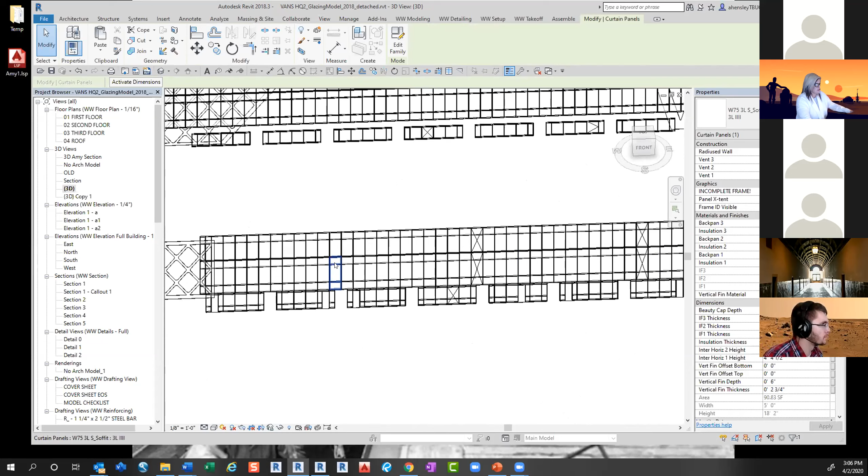And that makes it a lot easier to deal with sometimes. It can get crazy. So again, that was the right-click duplicate, and then rename it if you want.

Orient that view by right-clicking. If you don't right-click right on the ring, you won't necessarily get that option to orient it to a view. So that's why I find that if I do it right over the ring, then I get that orient to view option. And then you can pick any one of your existing views.

So the last thing before we take a little break is exporting these views. Sometimes people want to export stuff to DWG, and that's really easy to do once you have the views created. So if I want to export the first floor, I can make it active, make it current by opening it, and then I do File, Export, CAD, DWG.

I'm going to walk through this a couple times. I get my options here, say Next, and then I can save it with the automatic long name, automatic short, manual, all that, and it will export it to AutoCAD. So I'll go through that again and then get into the detail of the settings.

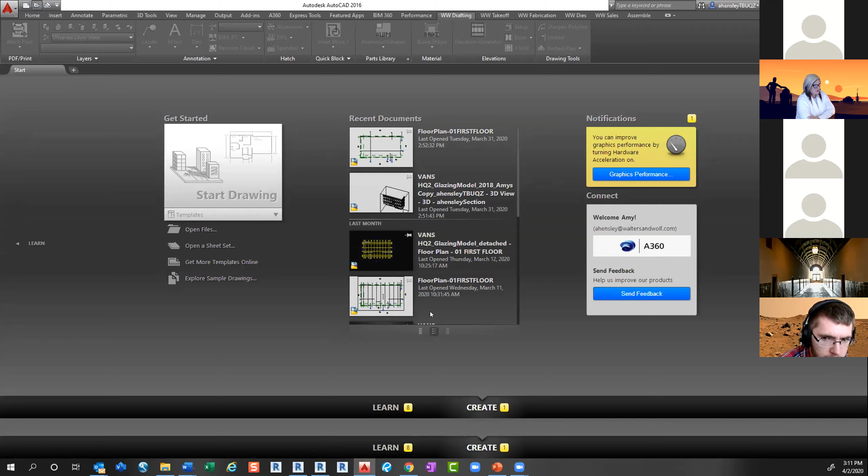And it takes a little while for my AutoCAD to open, probably trying to read on the server. Okay, so let's just grab this guy and open it. And there's my 2D CAD file with all the shapes.

Okay, so that was exporting the current view with the Walters and Wolf setup. If you have a bunch of views and need to export them to CAD, the workaround is to first create a print set, but not actually print. So I go File, Print.

Down here I choose Selected Views, and I'm going to make a selection set. I'll select Check None to make sure nothing is selected that I can't see. I'm not interested in sheets, just some elevations, so maybe I'll grab my little elevations or my full elevations.

I'm going to save this as a group or set called elevations. Now that set's in my list, I pick OK to save that step, but close without printing, because I'll use that set when I go to Export, CAD, DWG. In this drop down, I grab my elevation set, so instead of exporting each view one by one, I can do it in one step after creating that set. When I say next, it exports them all.

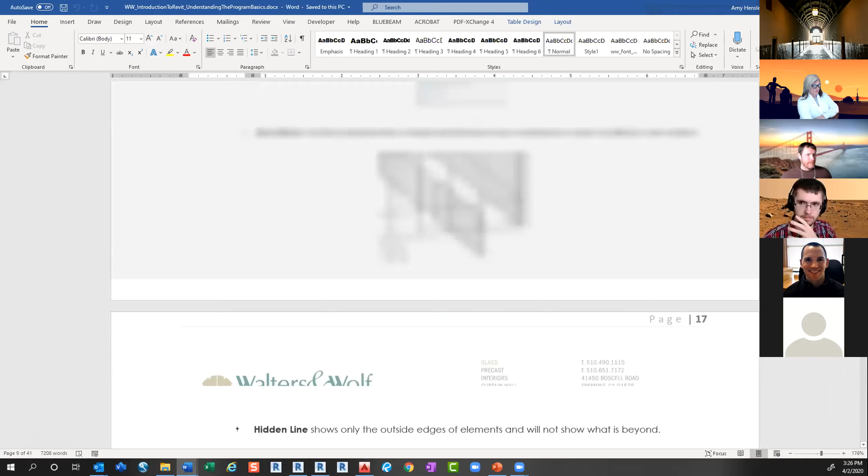So at this point, you guys have been good about jumping in with questions, hopefully everybody's doing okay. But everything we've been talking about is in this document. I haven't put it on the wiki yet, but it does exist on our server.

What it has—it's a PDF, and I attached videos to it. So if I open this PDF in Bluebeam, give it a second... whoops. You'll see little paper clips next to certain sections. If you double click on that paper clip and pick open, it will open a video that's a short clip of that particular step.

So it'll walk you through it just like we did today. Those are little videos attached throughout this Revit document—you can just close that. So that'll hopefully be a resource for you.

Right now it's on the server in the same location as the Revit files. Until I test it, what I'm telling people is it might be—oops, wrong one—it might be fastest to copy it to your local drive to use it, because it is kind of big, 159 megs, since it has those videos attached.

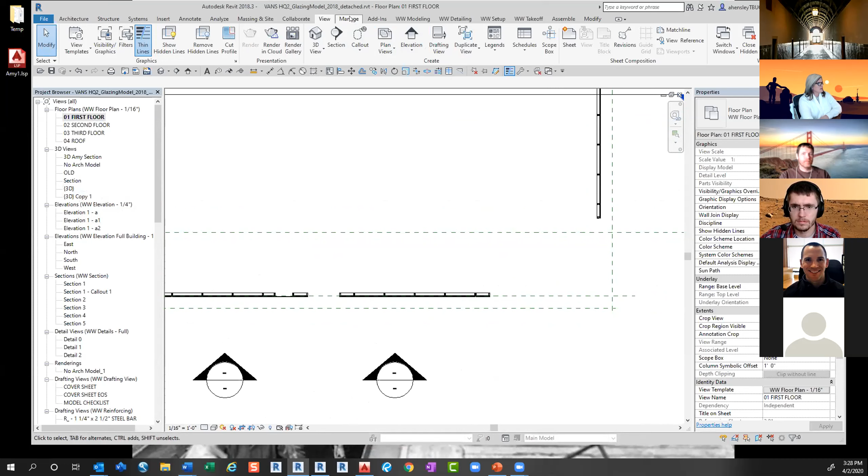On the Manage tab, there's the little snaps magnet here, and that's where all your snap things are. So when I worked in AutoCAD, I usually had just like an OS mode with endpoint, quadrant, and node or something like that, because I didn't want all the conflicting things. But I've never really had a problem with that in Revit, so I leave mine at the default.

Revit finds so much and does so much on its own intuitively that I find myself just one-handed drafting now, whereas in AutoCAD I used to always have a left hand on the shortcut keys and right hand on the mouse. It's not leisurely, but it's a lot less of all that typing and stuff, because Revit does so much already for you.

Even if I select an item, you can see temporary dimensions, and if I want those temporary dimensions to be real dimensions, I can just pick on that little symbol and I have a dimension. All I did was pick twice. I didn't do any command, I didn't go into anything, I'm just simply picking it.

Question? Nope, okay. So we'll talk about those temporary dimensions again.

But there's so much that Revit does that I just kind of roll with it the way it is, and it's pretty cool, pretty intuitive.

Most of the editing tools you would need are going to be on Modify or Annotate. So we'll start with Modify, because that's where all of the action tools are, like Move and Align, which is my favorite Revit tool. So in AutoCAD, you start the command, select an item, move it, or I don't know if you still have to do that, but that's how it was a long time ago when I used to work in it. But in Revit, you pick the item first and then tell it what you want to do with it.

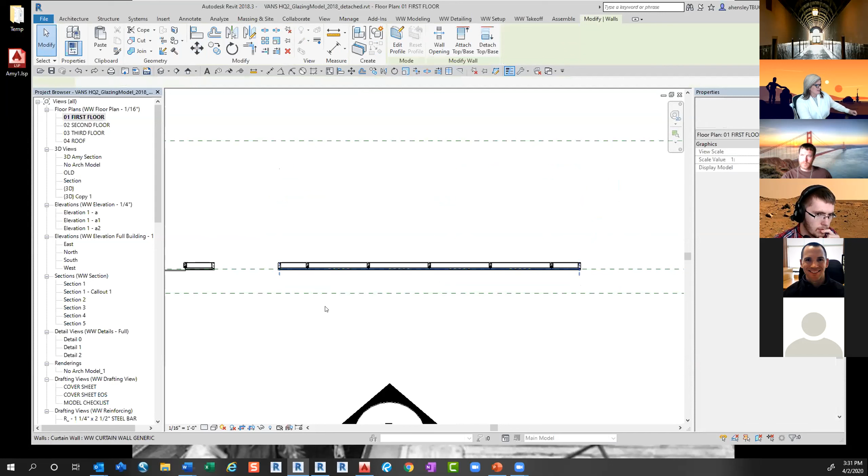I can move it by picking a base point and picking another point. I can move it by picking a base point and typing in how far I need it to go, so there's a little live dimension. I'm going to just undo that. I can pick on it and drag it to move it. I can pick on it and edit that dimension to move it. So all of that was just very few touches, very few clicks.

But without the move command, it already wants you to move stuff on its own. You see it already has a little move where my mouse is, which is the same as that. So you can do a lot of moving without actually using the move command.

The align command, I'm going to create some drafting here. I'm going to just draw a line with my line command. Oops, I want it to be continuous. I didn't follow through with it.

There we go. So say I wanted this line to align with the edge of that mullion. I'll go Modify Align, select the edge of that mullion, and then just pick that. So I didn't have to use Move, base point, second point, or any of that. It's just align this with that. So I use that a lot in Revit, it cuts out a lot of picks and clicks.

You can't align walls. If I wanted to align this wall with that reference plane, that's one of the few limitations. I don't believe it'll let me grab that wall. Yeah, I can't even... I'm just tabbing till I get the wall to highlight. Oh, it did, if I grab it right, it will let me. Okay, great, so align is awesome.

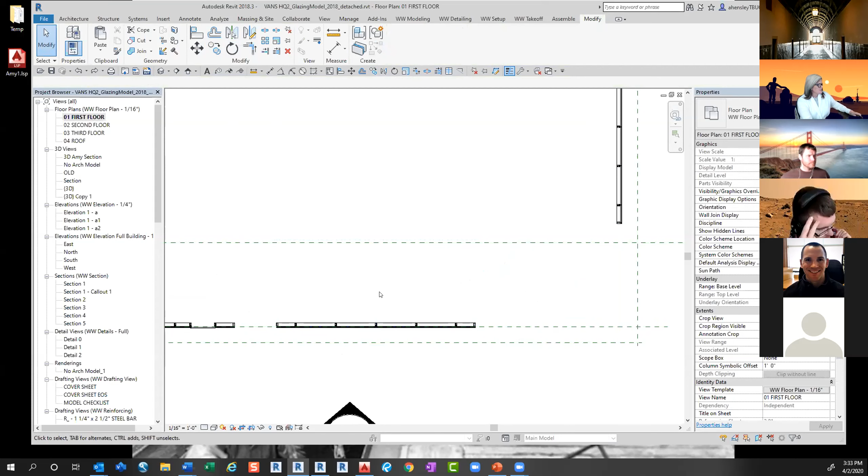Let's see, we've got rotate. I'll show you some of these on some line work instead of a wall. So I'm just going to create some lines, make that continuous. Create a line here, line here. Let's create a circle.

If I want to rotate this, I pick on it and select the rotate command. It finds the midpoint of your element by itself, but maybe I want to rotate it around this intersection. So I can pick and drag that grip, let go with my mouse. Now I can pick another point, or with those dimensions, type in 45 - so it rotated about that point by 45 degrees.

It works a little different compared to AutoCAD - I don't work in AutoCAD as much anymore, but it took me a while to understand the difference in the rotate command. If I want to do it with the base point, I pick and drag that rotate point to the end, pick the other end, and say rotate it to that.

I can also just pick on it, and since it already has an angle, I can just say 60 - I didn't even run a command, I just picked on it and edited that because it has these temporary dimensions for me. I can pick on it, say it's 20 feet, and then rotate it. So you can use the commands again, or you can use those temporary dimensions.

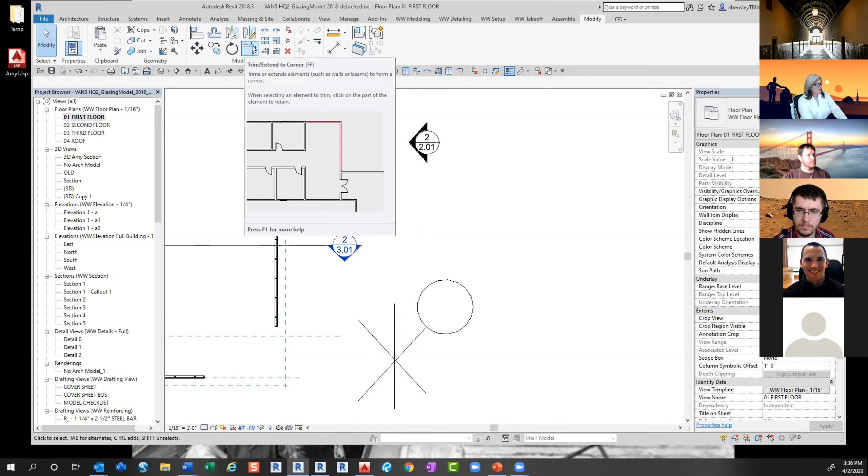This one here is trim extend, which to me is like filleting. That is the one shortcut key I actually set in my Revit - you can customize your shortcut keys. I was so used to FF equaling fillet 0 in AutoCAD that I made my trim extend equal FF, and it even shows my little shortcut key in parentheses next to there.

We'll talk about the command, but I'll show you on that note that if you go into Options and user interface, keyboard shortcuts is right here. It's really easy to customize. I know the command is trim extend, so I just start typing to search for it, and then come down here - you can see it's already assigned, but if it wasn't, I just come down here and type in FF and assign.

And there's my shortcut key. I pick OK, and it's ready for me right now - I don't have to reinitialize the PGP file or anything like that. So if you want to make your own shortcut keys once you get used to these commands and like having your hand on the keyboard, you can come into user interface keyboard shortcuts, grab your command, and set it to what you want.

So fillet 0, as I call it, or trim extend - if you have 2 lines... I keep going outside, that's the reason it's disappearing, I'll show you really quick. If I make the crop region visible, you can see the crop region, and the annotation crop is the same apparently. Where's the annotation? Oh, there it is - yeah, my mistake. So yeah, I went outside the crop region.

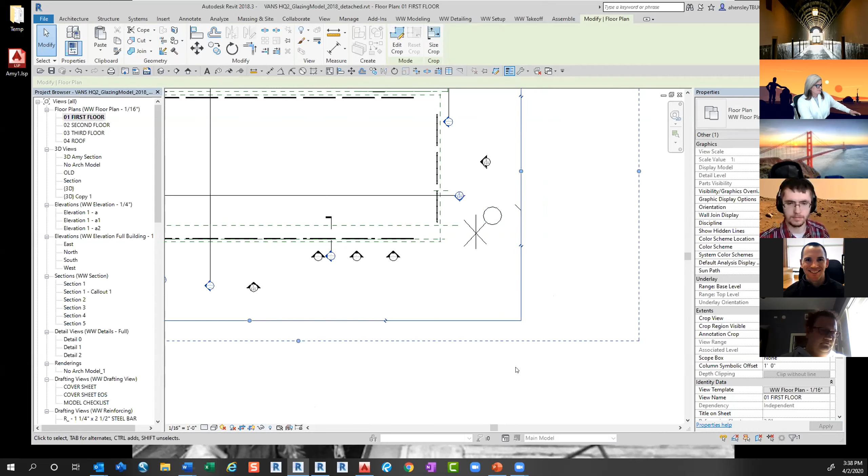If you're ever wondering why you have a note outside or something and it's outside that double line annotation crop region, that was only showing up when I hovered, it's because of that. You can make it bigger to include your annotation. So that's adjustable.

We'll go back inside here. So if I do this, and I have a line here, and I do that trim extend, it does that. If you do want to do a fillet with a radius, we'll look at that, and that's in another place. That's in another command when we're in annotate.

So that's trim extend, it just joins your lines together. There's array, which I hardly ever use in Revit, scale, and a couple other trim extend options here. There's splitting an element, and splitting an element with a gap.

So if you have a circle and you want to split it, you could pick your 2 points, and now you have 2 halves. Not 2 halves that are separated, let go. I should be able to just delete the half. There we go. But I can still come back in here and grab that grip and bring it back around if I want. So that's the split element.

I use that occasionally. We've got delete, which is like erase - there's no erase in Revit, it's all delete. And pin and unpin. Pin and unpin are good when you have things in your model and you're working with either yourself and you tend to accidentally move things, or with other people. When we link in an architect's model, we typically pin that in place, and that means it can't be moved.

So if I pick on this wall right now, I can move it. I'll do a little undo. I'll pick on that wall and I'll just pin it. Now there's a little push pin. Now I can't drag it, which is a good thing because then I don't break it. But I can unpin it there or unpin it up here, and then I can edit it again.

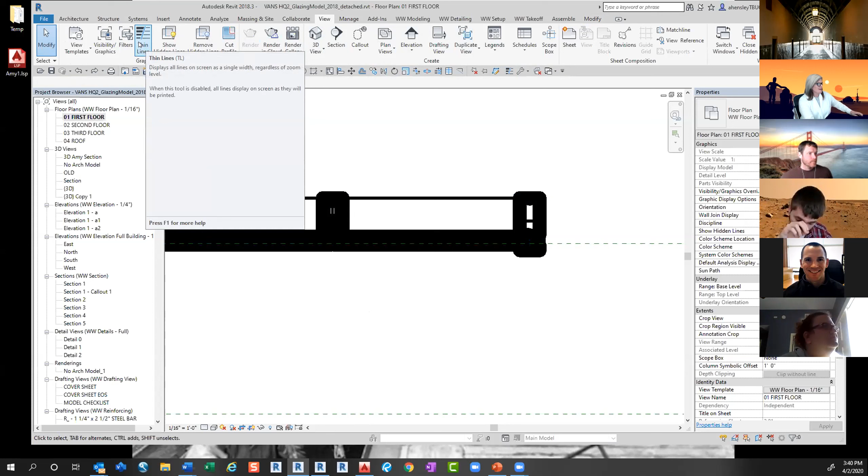Okay, so go to - I found it on the View tab, I have it on my shortcut key or shortcut bar - but go to the View tab, and there's this Thin Lines button over here. Set that. The reason it's like that is it's going to show you what it looks like when you're plotting, but other than that, I never have that on. So once you set it once in Revit, it should remember that every time you open it from now on.

Because that is really annoying, it used to not stick. Yeah, so that's your answer there. Awesome, thank you. You're welcome.

Okay, so I will draw - let me get one other thing in here. Let's do a little ellipse. So if you're drafting in here and you need to do some offsetting, a couple ways to do it. So if we're in the Modify tab and we use the Offset tool, again, you have options up here. They're not at the bottom of the screen, so you just need to look up here, and you can say I want to offset 6 inches.

And when you hover over, it's going to let you know which options are available for offsetting, and then you just pick. Once it's highlighted the way you want it, you just keep picking. And there it goes. But I don't use that as much as I use offsetting in another way.

So we're gonna switch from the Modify tab here, kind of segue into the Annotating Drawing tab or option. We looked at some general tools - you don't always need them. We're gonna look at some drawing tools, and then we're gonna talk about temporary dimensions, and just ways where you don't even hardly need some of these tools sometimes.

But going back to offset, you can offset there. So you could draw a line, you can offset it 6 inches. But if you already know that you need to lay out - maybe the edge of slab is supposed to be 6 inches behind this - you can use this on the draw palette. There's this pick lines option. So I'm not in any command right now, I'm saying I want to pick lines to create something.

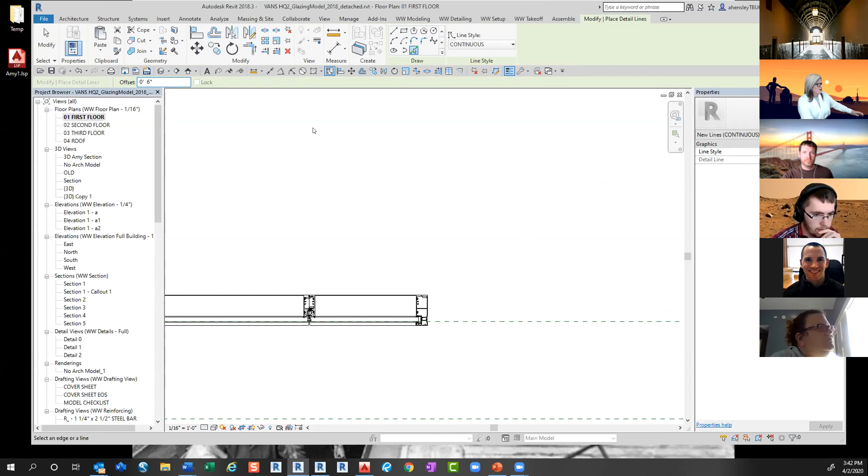I'm going to say I need it to be 6 inches off of this thing I'm going to pick. And then I hover to the back of that mullion, and hopefully you can see those little dashed blue lines. Because they were on the side that I wanted, look, it's still giving me options. Where else do you want to offset? Now I have this line there, and I can pick and drag it.

I didn't do the line command. I didn't do the offset command. All I did was the pick lines command and put a dimension in, hovered, and got that. It drew the lines for me. So a lot less commands, a lot less when you're trying to construct. You don't need construction lines. You don't have to do so much.

So if I know that my jamb is 1 inch off of here and there is no jamb for me, I could go into annotate. There's my detail line, and we'll get into that again, and then pick lines. So I can say okay, 1 inch. I need something 1 inch off of this.

So we were talking about being on the Modify tab and using the offset command, which is fine. Sometimes you need it that way. But if you need to draw something that's offset from something else, I would say go to annotate, and we're going to go into this detail line command.

So instead of saying in the command line rectangle, I want to draw a rectangle, I want to draw a circle, I want to do this or that, in Revit you just go to detail line and choose from the little palette what type of thing you want to draw. Line comes up by default. There's a rectangle and polygons. Again, how many sides do you need it to be? I want it to be 8 sides.

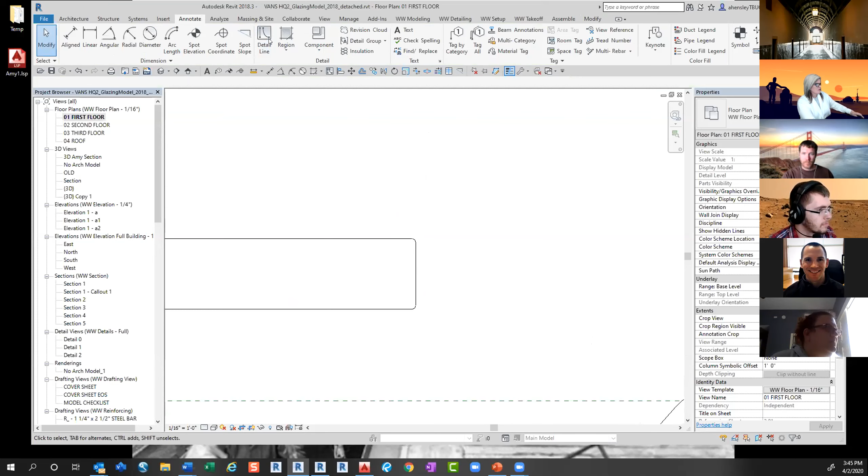Then I pick my 2 lines. Detail line, go to that palette, and hover till you see fillet arc. So you have start end radius, center ends, tangent. So there's a bunch of different things. You can make a spline.

But this pick lines is the best. So now if I knew I needed something offset from that, I can do pick lines, 1 inch. I can either select one thing at a time, or if I hit tab, I can select the whole thing. So it just did a big offset outline for me just by hitting tab. Hover and no tab, just one, hit tab, it finds the whole profile and does that for you.

I don't know if you'll ever need that, but when I'm working in Revit, I use the offset a lot when I'm trying to do layout. The pick lines and the offset. Pick lines will let you trace an item.

So when I'm creating the Revit detail family, part families, not the detail families, but the part families, let's just go into one really quick. So this is the frame family, and I'm going to go into a part, the vertical mullion, vertical plan view. In these parts, we have a very basic 3D shape to represent the metal extrusion space it takes up. And then this is just a 2D DWG underlay or import.

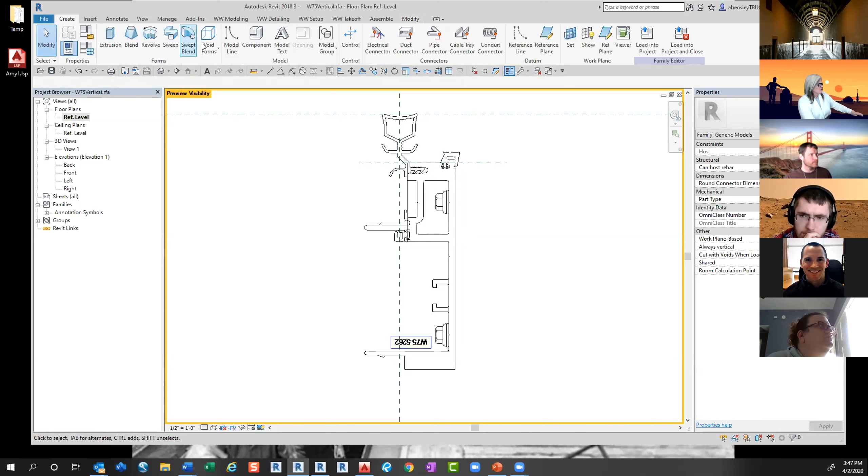So it keeps the part lightweight, but when we cut through it, we can see it. So when I'm first creating that extrusion shape, I will tell it create extrusion, and then I just use the pick line, and it highlights what I want. So I'm not drawing, I'm just using pick line and letting it find what it finds. And so it's very fast.

If I want, I can also, I don't do it to this extent, but you can use pick lines and then tab, and it'll find even a whole shape for you. So pick lines is really handy. Saves a lot of time.

Don't want to save anything there. And don't want to save anything there. Okay.

So that was annotate, detail line. Here are your drawing tools. When you go to draw, this is where you set your line style too. The line style types are controlled somewhere else, so whatever's been set up in the project will be available to you right here. If you know you want to draw a hidden line, you can do the line command, select hidden, and pick on it. You can pick on it afterwards and go back and change it.

So in all of this stuff I've been doing, we'll go back to talking about the dimensions, the temporary dimensions, and all these things that show up. There are dimensions, there are grips on the dimensions, the little blue dots. Revit just throws these dimensions in where it thinks you might need them.

Here's an arc, but I can adjust this arc in a couple of different ways just by picking on it and saying, no, it should be 12 inches for that radius. And see, that's the length by default. If I change this, it changes the length for me. Let's see if I can do 65. So I can edit that arc just by picking on those.

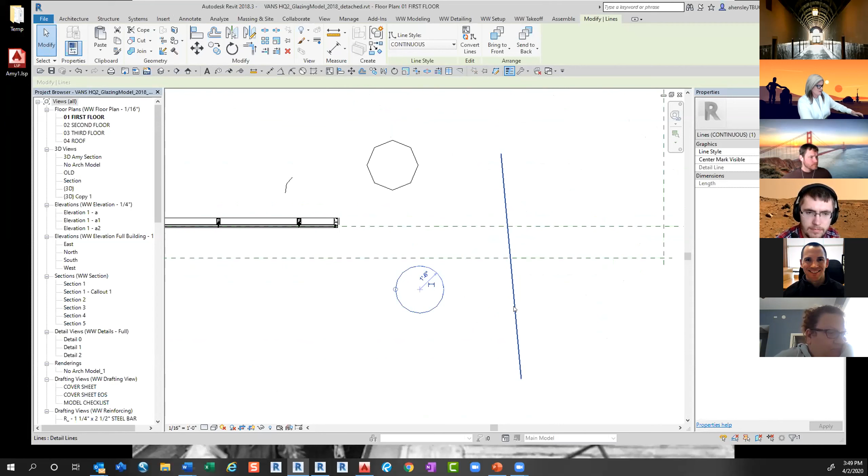So a lot of things have these temporary dimensions, with no editing, no commands. Again, I know I'm repeating myself, but it's just really handy. So you can modify by using those temporary dimensions, and we'll get into actual dimensioning and show how dimensions drive things as well.

So if I want to add dimensions, I go to the Annotate tab as well, and you can see all of these dimension styles up here, or dimension formats. Aligned and linear seem like they would be about the same. I don't ever use linear because it restricts you to just horizontal or vertical, whereas aligned will let you do anything.

So when I pick on aligned, I can pull a dimension just by selecting. You can see that Revit finds things for you, it even finds the endpoint of that line for me. So I'm just single clicking right now, and I'll just go to here and grab these curtain grids and get my dimensions. Going back to what we were talking about earlier, I'm going to move these out of the way. I'm just selecting and dragging, not doing any commands right now.

Let's do this. I'm going to go to View, Call Out, Rectangle, and create my call out, which creates my view. Now I'm going to annotate, align, and grab my dimensions.

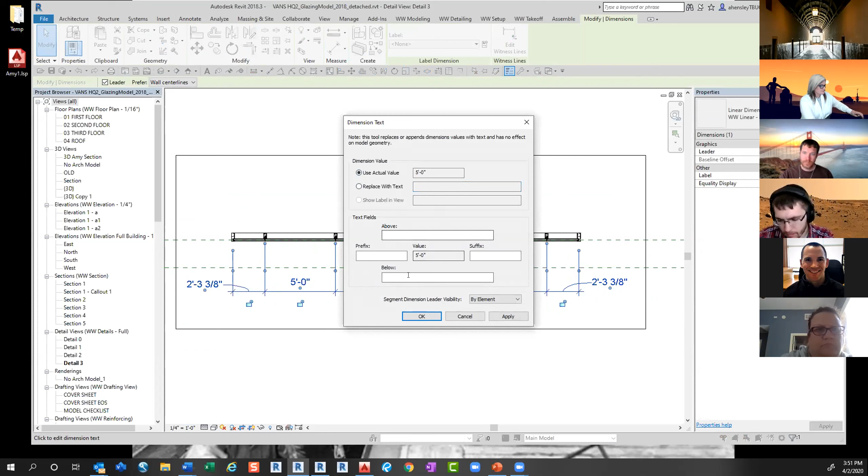You're never allowed to force dimensions in Revit. It will not let you force it. You can edit it, like what it looks like. I can double click on a dimension and replace that 5'0" with text, but I can't force a dimension. It will know if you're trying to put a dimension in here, and it will not let you do it. And I could say modify and put that below. I could dimension all the way out.

Or if I wanted to come in here and show that rough opening, I'll go to my detail. Oh, sorry, I should do it on here. Annotate detail line, pick line, give myself a line there, give myself a line over here. I'm tabbing now to get it to highlight. And then I could put that dimension from center to center, but what I really wanted on is rough opening.

So if I pick on that dimension now, I get my little blue grip in the middle, not the one on the end, but the one in the middle will let me pick it and drag it to that other element, to that joint instead. Then I can double click on that and put RO. So pretty easy to dimension, you just can't force anything.

And again, you have these little blue grips. And then I could come in here, put another little dimension on the end. I could grab this one, I just hit escape to get out of that. I could grab that one and that one, so it will add that leader for you.

Double click to edit it. You could put, I don't see a way to do alternate units. Oh, that's in the unit setting of the dimension. So you can create that call out, set the scale, and put your dimensions in it pretty quickly.

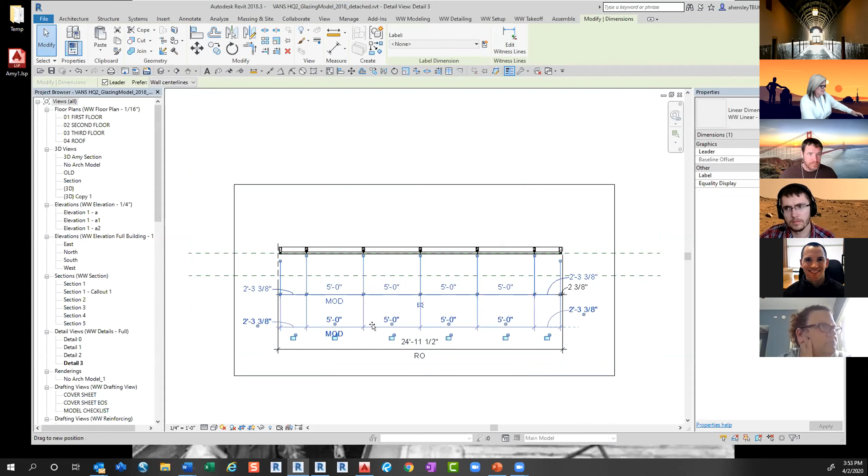Let's see, that's a good question. I don't know, when I tried to do that before in Revit, there wasn't a really great way to do it. You could put it on the extension line, but it didn't really work well. So that was one of the things I think I still used to just do manually. I still drew them in there because it was a carryover from drafting.

So if I do detail line and make it center, right now I could even use my pick to find it. There it is. And then I can drag it out to the point where it starts to look like a center line, and do some drafting here.

Let's try that again. I would pull the end of this line. Oh wait, no, if I pull this onto that, then I got my little gap. But that's all manual drafting, and last I knew, making the extension line work as a center line just never seemed to work very well.

So it got to the point where people just knew, oh, you could add mod. I'll have to look into that though, and maybe it's gotten better. It's been a while since I've looked at that, but that's a good question.

So you kind of break things at this point, because the next thing I was going to show you is that with that dimension going to that element, if I tab over it and select that curtain grid, these dimensions become editable and I can actually change the model. So I've added the dimensions and now I'm driving the model by changing those dimensions. It just takes a sec to process because it's rebuilding those frames.

If I do what I just showed you and put a center line on here and associate the dimensions to the center line, I can no longer control that grid with these. So it creates a disconnect to make it look nice, to make it look like what we're used to, if I've completely disconnected my dimension from driving the model at that point. So not a great setup.

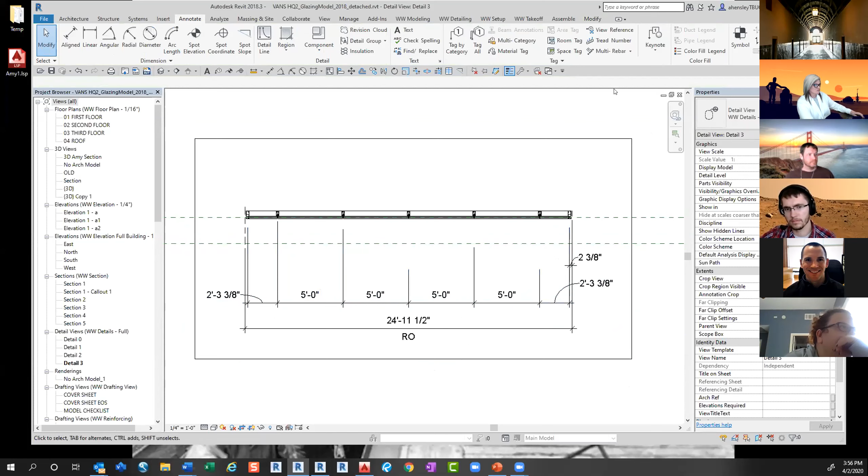It's all tied. So the same kind of thing here, like this arc, you saw me earlier changing this to... I'll change it to 24 inches, and you can change the length. So these are just temporary dimensions.

If I want them to be permanent dimensions, again, I can just pick on that symbol. That one isn't a good one because it's on there. There we go, now it's on the outside. So I can look at that and say, yeah, I'm good with that. And I pick on this little symbol, and it actually does the annotating for me.

Of course, it's huge right now. Let's change this. Let's change this. Well, I won't do it in this then, but you can change the scale to make it look right.

So if we go to a line, same kind of thing. These are our options. We can edit the angle. We can edit this dimension here. We can edit this dimension here. And then when we're good with it, we can make it a permanent dimension. Actually, that one's not letting me make that one a permanent dimension on the angle. Only the line is. So it might have some restrictions.

But you can mess around with that. 48, 32. Yeah, that one's only making a couple of those available. But without very many commands, you're doing drawing, drafting, annotating. 36 inches. And then leave that on there.

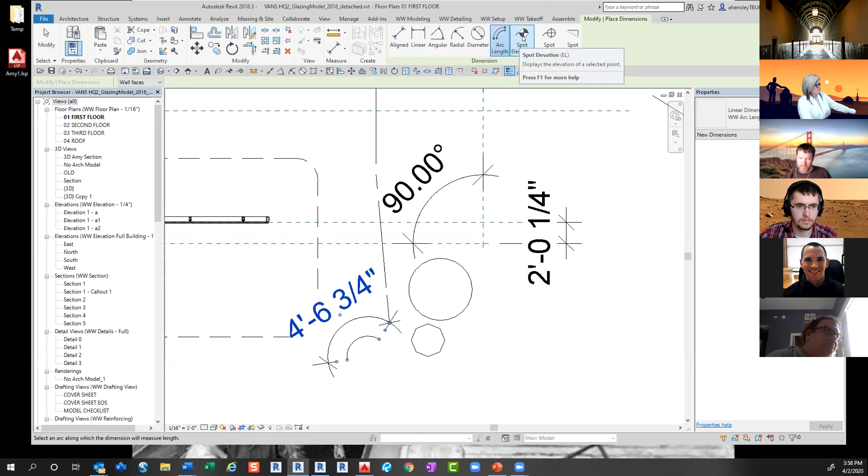So this one, I'm wondering if you guys will find this really handy. Spot elevation, I really like this one. I was working on embed sets and dealing with structure a lot. You're in a floor plan, but you need to know where things are, where does it live. So if I do a spot elevation and select this horizontal, it tells me it's 3'1.5" above 0.

So I'm going to grab my little section and go to that view. And if I do that spot elevation, there's that 3'1.5". So that can be really handy when I bring in the structural model. I think maybe you'll find it handy.

So if I want to know where that soffit is on the bottom, annotate, spot elevation, there's our work point, and it's at 12 feet. And then these you can do a little editing. You have some options for those as well. That's really nice, especially if you're working in a plan, sometimes to be able to pull that information.

So there's some good tools there. And when you are creating that dimension, the style is controlled over here in the properties. Depending on what kind of project you're working with, you'll have different settings in there.

That's kind of the stuff that, eventually if we did another Revit class, we could teach people how to make their own custom stuff like that. But this is just to touch on what's there. Sometimes you're just stuck with what comes in the project. If you know how to get in and create a style, make it red, make it bold, you can go in here, duplicate, and play with some of those settings. So the dimension styles are controlled there.

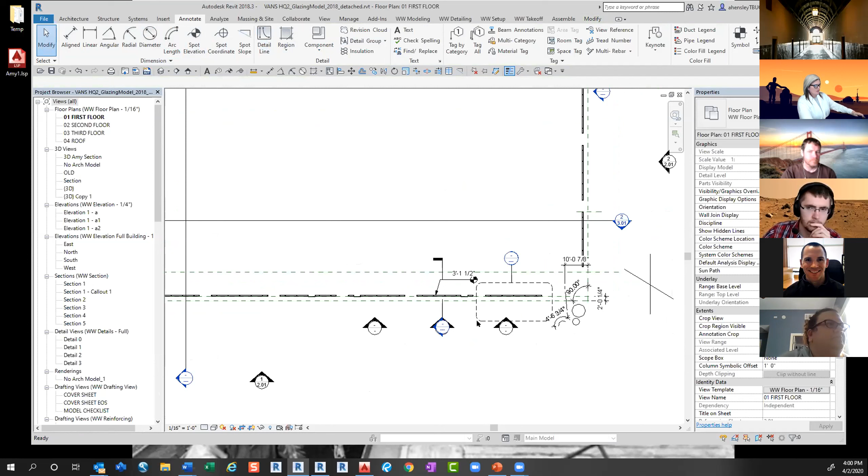So if I go to my enlarged view, I got dimension lines all over the place now. To create a text note on the Annotate tab, there's the text, the big A for text. Again, it just opens a little palette with all of your options. Here's your justification. You can choose if you don't want a leader, if you want a leader that has one segment, a leader with two segments, or a radius, like a curved leader.

So if I start with no leader, okay, I just start typing and there's my note, and I can move it, and I can drag it out to make it fit, whatever. I can also pick on that same note. Sorry, I'm hitting escape here. Do you want to keep your changes? No. Okay, escape. All right, pick on the note.

The contextual tab comes up. I can add an arc. I can add an arc to each side. You can see that now that my note has 2 lines, this is coming off the bottom. I can fix that right here by making it come off the top on both sides. I can remove a leader, add a leader, do a little bit of this to it, drag that over there. So you have some options in here that make it quick to edit.

Double click to edit it, whatever you want to do there. Sometimes it's a little finicky, and I don't know why. I think there's still some carryover from what I'm used to from AutoCAD, and I don't do notes a lot in Revit, so sometimes I get annoyed with it, but if you use it enough, it has some nice features.

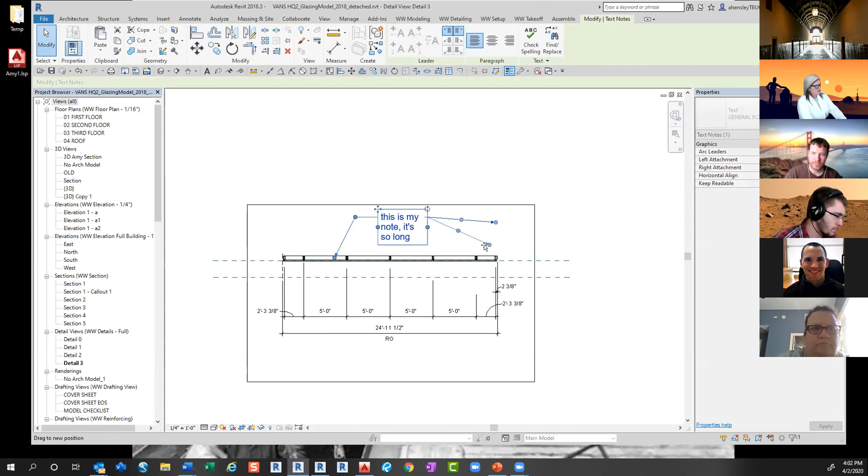I'll show you if we go outside the crop region, see how it disappears. If you're wondering where your note went, it's because it's outside of it. You just drag your crop region. Once enough of it's inside of it, it shows up again. If you aren't sure where it went, you can just say, don't crop the view. Oh, there's my note. Grab it, bring it in, crop your view. So if it disappears, it's a crop region thing usually.

Okay, so notes are basic. You can create note styles; text styles are also controlled over here. If you want to make your own style, you can edit a type, duplicate it, give it a new name, change it to bold and red or whatever. So that's all in there, but we won't get into it too much today, just know that's where it's controlled if you want to mess around with it.

Can you walk through one more time how to get to those? Is it on the annotate tab? Yeah, annotate has dimensions, detail, and text. You should find a button on there somewhere that's a big A. It's scrunched on mine because I'm not maximized right now. Okay, got it, with the big A. Yeah, then pick what you want. If I pick arc, it starts the leader for me and lets me type. I can go back, change my mind, pick on it, delete that, and add a segment instead. It's pretty flexible. If you get something in there that's not what you want, you can pick on it and change it pretty easily. So annotate for dimensioning, detailing, and text.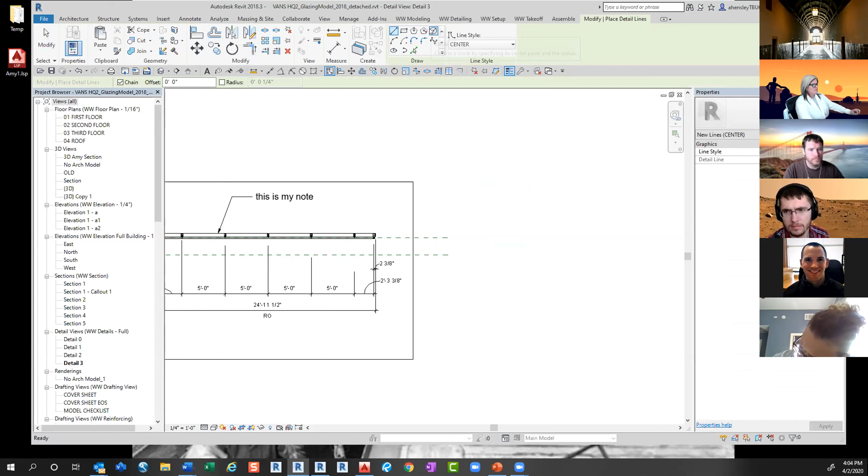So we talked about move, align, offset, rotate, mirror, drawing lines and circles, all those things being on that detail line. It's easy to edit these once you get them in. A lot of times when I'm doing something like this, I don't bother making it perfect when I put it in, because I know I'll be able to go back, draw it in there, pick on it, and adjust it—say I need that to go there, or I only need it to be 8 feet, and that one to be 10 feet. So you can be a little lazy when you're first drawing something, since it's easy to go back and change it. We're just using those temporary dimensions, so it's friendly drafting.

Let's see, okay. Yeah, we're just about to the end. We're going to talk about customizing the workspace, but I want to bring in that structural model and show you what I'm talking about—one of the things we didn't really get into yet was links.

Okay, so I'm on the first floor and I'm going to link in—you guys don't have to worry about doing this, I'm just going to do it to show you. I'm going to insert a Revit link and grab the structure model. I need to go to my project... oops, I switched it.

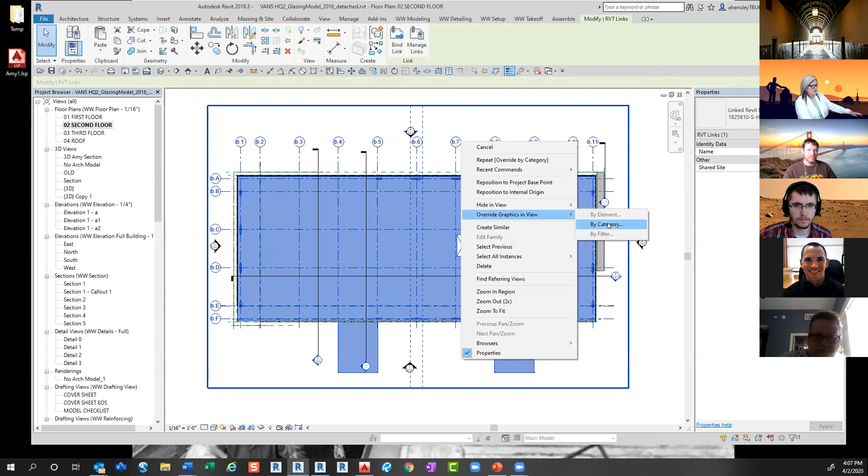So if I do that in a floor plan—let's go to second floor—I can see that if I pick on their grid, it selects the whole thing because it's like an XREF, like a link. So I'll right click, override graphics. There's probably a template—there's a template, let me turn off the template. Pick on that: override graphics by category, halftone. Okay, now I can see the structure, but our stuff shows solid.

So this is what I'm talking about right here—here's a column, and it just looks like some little lines because we're on coarse detail. If I come down to the detail level, which you can also see up here in properties, and set it to medium, it starts to look more like the right shape, like an I-beam or I-shape. If I set it to fine, then we get the real shape.

So here's a case where I'm at the second floor, I can see the structure, and I want to look down to the first floor. So I'm going into my view range and saying I want to look all the way down through, because I want to see what beams are running through. Are they going to show me anything?

Okay, maybe not. Let's go to a section view and see what we're dealing with. There's my little I-beam. Let's set that to fine. I'm going to pick on it, override category, halftone. You don't have to do that, that's just my personal preference.

So if I'm at the second floor and I look down to the first floor, why didn't I see that stuff? Oh, because I'm not in wireframe. All right, so now I set it to wireframe. Now I'm starting to see some stuff, my second floor and my first floor, and I can see some beams and columns happening.

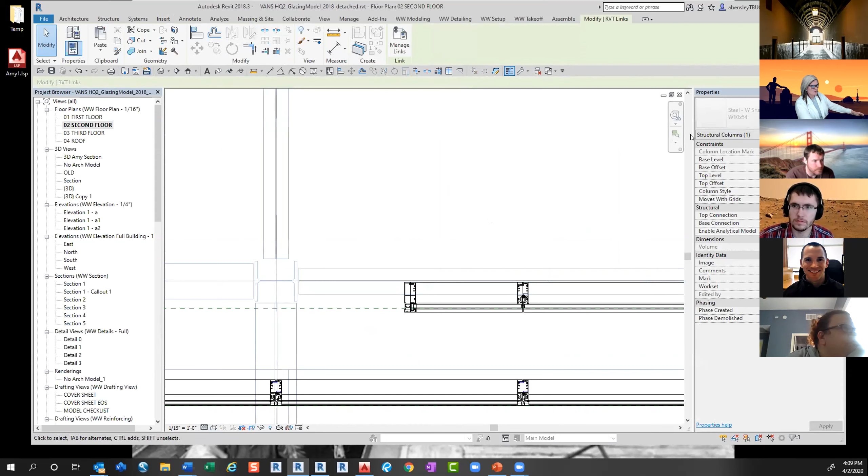If I want to check where that is, first of all, I can hit tab to select even in their model. It tells me it's a W21 by 44. So you can get information from somebody else's model, depending on how they've modeled it, to know what you're working with. And then if we go into a section view, I can pull that spot elevation off the bottom of their beam to find out where it is, or where their ceiling is, what am I working with and what do I have to watch out for, just for general information.

And here's our soffit, so what kind of stuff is going on. So now I have this nice picture of what's going on.

If I get these guys out of here, but I've linked in their model, I could come in here, go to view, call out, rectangle, and grab this whole thing, right click to go to that view and pick on their model, right click override. Oh, it made another template. Set that to none, right click on it, override by category, halftone. Now I have a nice detail of what's going on in that area.

And I can tab on these things to find out what am I working with. Oh, KPFF did this model, I know those guys. Let's see what it is. You can come in here and start to look at what's the structure. Well, it's concrete and steel, 6¼ inch deck.

So you get a lot more information, really. You still have to find out if you're allowed to trust the model, or if the contract documents, the PDF set, is really what's gold. But if you have that PDF set and you have the model, and you can see differences, you can ask questions about it and say why are there discrepancies, or which one takes precedent, which one's right. This gets you in and lets you see stuff a lot sooner.

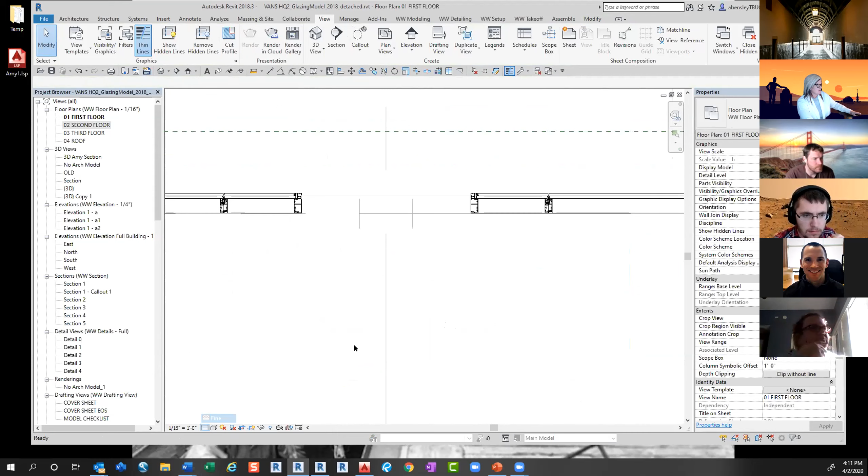Set that to fine. I don't know if for interiors, stuff like this is helpful, creating views and like where you guys are going with that. But I hope

that this stuff you're seeing today helps you feel comfortable getting into the model, navigating around, you know, project managers or anybody.

I know Pedro and Laverne, he uses this for estimating. Right now, we still have our estimators do their own takeoffs, and we have our sales model guys doing their thing, and then we compare notes. So Pedro will go in and create his own elevations and export them to CAD, and then do his own takeoffs right off of that. So he can use it. He's learned how to navigate it and create his own views, and it's been a big help, I think, for him, especially when the PDFs are not great or really not organized.

You can learn how to get in and just get to what you need. So I'll just touch a little bit on customizing the workspace, and then we can circle back around to anything else, we've got plenty of time. I don't mind sitting here if some people are done and want to leave, and other people want to ask questions. But to customize your workspace, by default that quick access toolbar up above, there's a little down arrow at the right of that short quick access toolbar.

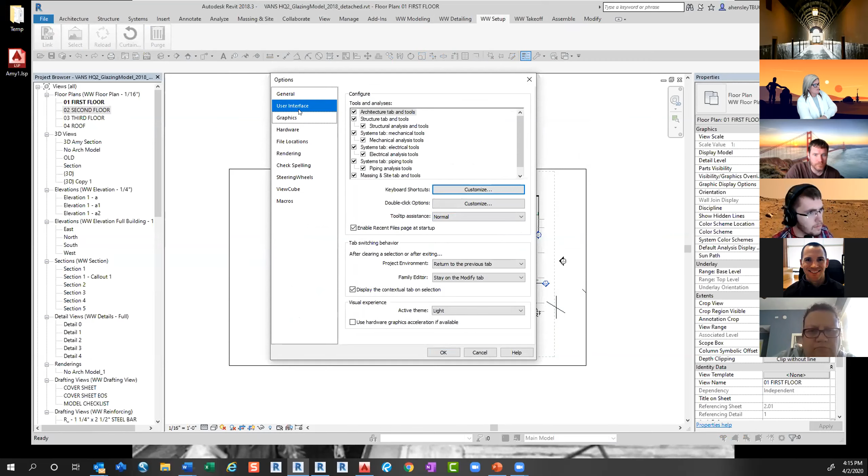There's lots of stuff in here that you could probably mess with, but I've used Revit since the 2009 version, and there's just not a lot. Everything was so customized in AutoCAD, and there were so many routines that we had where I used to work, all this stuff and all these shortcut keys. And now I'm just kind of like, don't really need all of it.

But if you do and you like that kind of thing, you can certainly go in and poke around. I would say just be careful with file locations. This is where it saves your temporary files. If you change some of these paths, it's hard to remember to go back and fix them if you need them. So just be careful with that.

The other thing would be if you were opening a model that's shared with somebody else, there's this work sharing update frequency bar here that can slow you down or speed you up. I just keep mine set all the way down. What this means is Revit is constantly checking in the background to see who's doing what and synchronizing, when it is a shared environment. So if you push this all the way down, then it improves your Revit performance.

But if you're just working in your own detached saved docs file, which we're going to do right now, you don't have to worry about that. So we detached, and we have not done any saving yet. If we save right now, it's going to prompt me for a file name. What do I want to call it? Remember in the very beginning we did file, open, found the file, and picked detach, so we're completely severing from any central file anybody else is working on. But we haven't saved yet. So when you go to save the first time, you'll get prompted for a save as, because it still doesn't know.

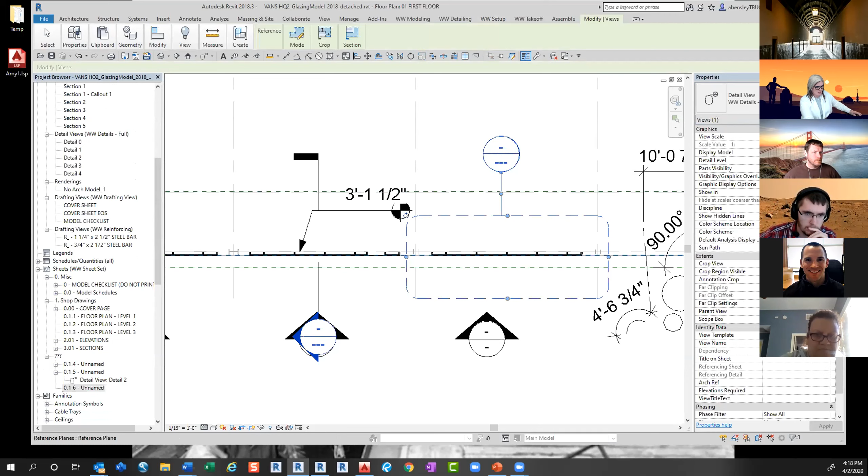So I want, what callout was that? So this one, I didn't put a name on it yet. As soon as I place this on a sheet with the name, that's going to fill in. I'll just touch on that really quick. There are these default sheet names that Revit's just assigning right now. So this view is... what are you? You are view 1 under the details view. Oh wait, sorry, I looked in the wrong place. You are detail 3. Okay, so I haven't renamed this.

I could name it enlarged plan 1, or 2-1. Okay, enlarged plan. All right, so there's my enlarged plan. I go to my sheet, and I place that plan on the sheet.

Now what's not on by default in here is the title, so let me turn it to yes. So now this view knows that it's 1 on this sheet. If I go back to that floor plan, Revit filled that in for me. So there's a lot less naming.

It's kind of like sheet sets. When Autodesk added sheet sets to AutoCAD, they took it from Revit. They had acquired Revit—I can't remember what year it was they acquired Revit—but after that, that's when they introduced sheet sets to AutoCAD, and they kind of worked, but they were kind of finicky. But it's the same idea.

You create the views, you name the views, you place the views on sheets. The views know where they live now. The sheets are named, the view has a number, so wherever that view lives, the callout fills in. Same thing with this elevation. It is... elevation is... come here, you've got to pick on it right.

Elevation 1. So if I go back to this sheet—1A, was it 1A1 or 1A2? It must have been 1A2. I place it, and now Revit's actually helping me align it. So I can place it, and now we'll get rid of that one. So here's my elevation, as you saw when I dragged it onto the sheet—because it also goes with that plan view, it's aligning it for me, which is nice.

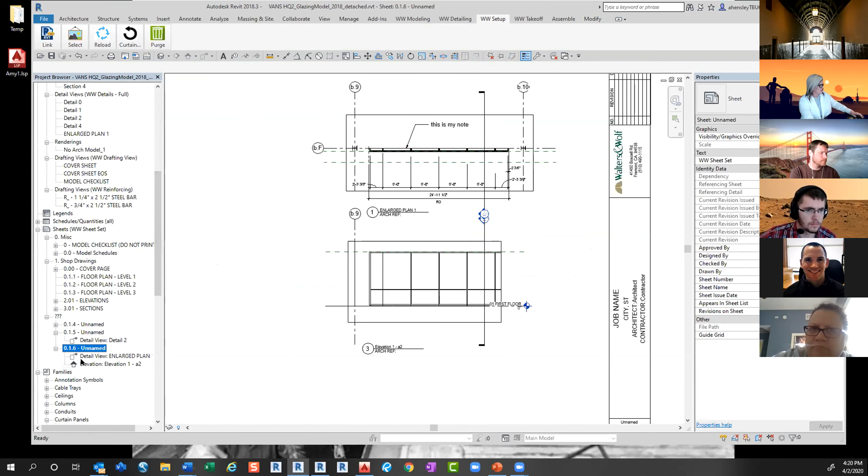There's my views, and then I will go into here and I will drag it. It should... there we go. It's going to give me that line—see that blue dashed line? That's how I know it's lining up. So I can come in here, I can shrink this down if I wanted, and yeah, hide that.

All right, so yeah, that helps you line things up when they do align, which is great. And you can start messing with creating that content.

Customizing a little bit there, yeah. So it's 421. Anybody at this point want to go back to anything? We can go through whatever you want. There's that other document, and we've got some stuff going on in chat.

What's going on? Can we walk through, Amy, one more time how to select the section and then name it, like put it on the sheet? Because I'm selecting mine, but I'm not really seeing it under my sheets. Okay, let me delete those off that sheet.

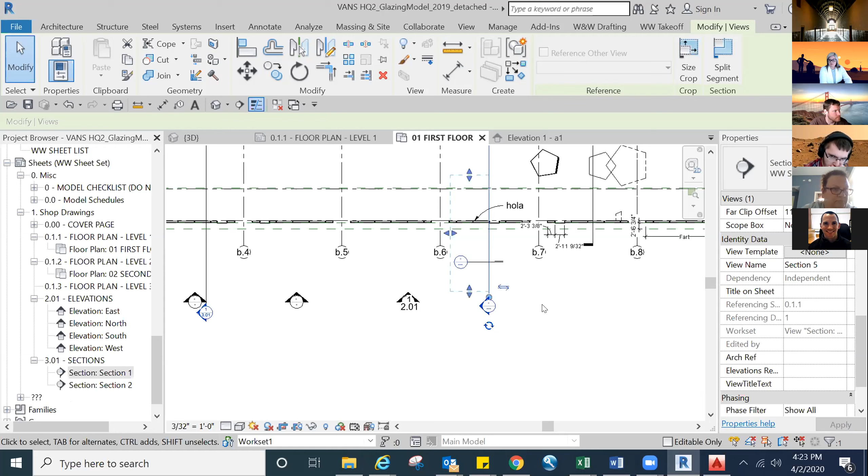Okay, so over in your browser, go up to your views. In here? Is that the one you want to place? First of all, I guess I should ask, is that the one you want to place? Yeah, I was just trying to. Okay, so we know it's section 5. And did you say you want to rename it first, or you just want to get it on a sheet? Just want to get it like on a sheet so that I can view it under here, right?

Okay, so there's section 5 in your browser on the left. So we can make a new sheet, or you can add it to an existing sheet. You need to have the sheet visible, current. Okay, so go ahead and make a new sheet. There you go, and title block, so that's good. You can just pick OK there, and you can preset it if you want, but those are placeholder sheets. Okay, so in this, because we haven't categorized the sheet at all, you have to go down to where there's those 3 little question marks on the bottom left in the browser and expand that, because there's some parameters we haven't filled in yet because of how this particular template is set up.

That's your sheet, so it's current. Now go back up to your view, your browser, up to that section view up above. So we've created the sheet. The sheet is visible, so you want the sheet to remain visible and current. And then we're going to go up in your browser and find it, there you go, and drag that right onto that sheet. Okay, now go ahead and just pick a point and drop it.

Got it. Okay, so now you're saying if I go back to—oh, that was not it. I lost my first floor. Okay, got it. All right. Okay, thank you. Cool. You're welcome.

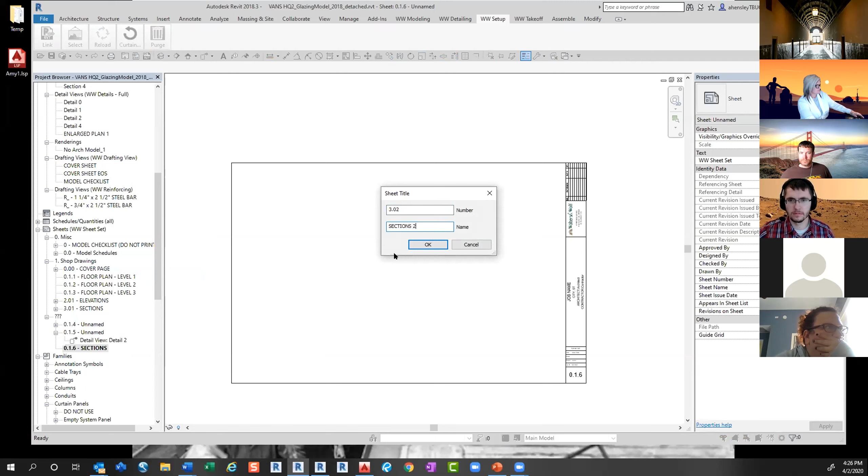Where is it saying it's already in use? Give new—what am I doing? Rename. Okay, I don't know why it's telling me that. Oh, I wonder—oh, okay. This is me learning the Walters and Wolf template. Sorry, I don't get in here very often.

The sheet already exists, so when you were scrolling down in there, you could have grabbed that. So what I was showing you about creating a new sheet, you could do it that way by just doing the title block. But if I want to make it, they have these placeholder sheets, so I apologize for that. I'm just not very familiar with all of this part yet. So now I have that 3.02. The reason it told me it already exists is because it was a placeholder sheet.

So I just took the next number. And what that did, because it's a placeholder, is it filled in the sheet name and categorized it. So this is what I was looking for up here. Every company does this differently, how they're organizing their sheets. This one is in this sheet set, sheet name, sheet number, appears in sheet list. I'm still not 100% familiar with what matters to get it to show up here.

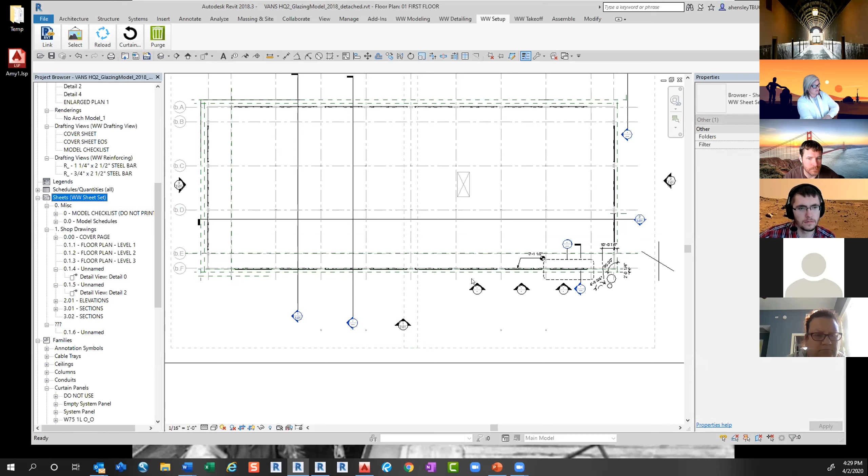I feel like we've done this a couple of times. If you start with our template and link somebody else's model in because you want to grab some stuff, it doesn't take that long to do that. And once that template is in, you have all of these sheets, all this placeholder stuff, all of these symbols that look nice, and the dimension styles and text styles are all set up.

Excuse me. So there's a couple ways to go about it, but if you do find you need help, Gabe can help you, he's a great resource. There are plenty of people that can help with this kind of thing. But I'm always happy to help somebody get something like this set up as well. I think it's great insight into a project.

So let's see, what else is in this here chat? Oh, where'd it go?